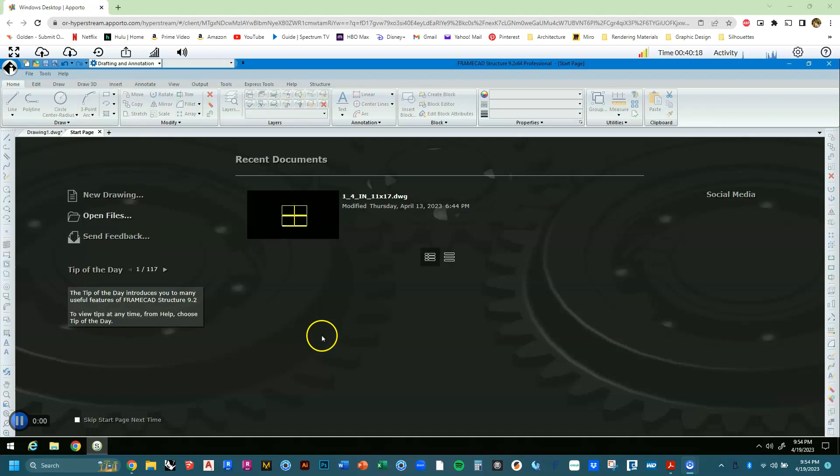Hey everybody, I'm sorry that I can't be in class today. I'm unfortunately doing a 30-hour OSHA safety training course in Santa Ana, and I'll be doing it this weekend, and I'll do it again in a couple of weeks. So, very sorry that I can't be there in class today.

But I thought I would go ahead and record a nice little video, and I'd like to go over the two-story house tutorial. I know a lot of us got a good head start on it in last class. I'm pretty proud of where everyone got to, but we got a little behind in certain steps. So I'm just going to record this video, and this will be the assignment that's due in the next week. So go ahead and use this video to help you get the tutorial done.

I've got my PDF open. I've got my binder here too, but I've got the two-story house PDF. Should be available there on Canvas. Let's go ahead and get started. So I'm going to open up FrameCAD Structure. I'm going to go to Open Files, and I'm going to navigate to my folder that I have on my desktop in Apporto. You guys should all have your little folders on the desktop if you made that in the first few weeks of class. I'm going to navigate to the correct folder where these files are currently living.

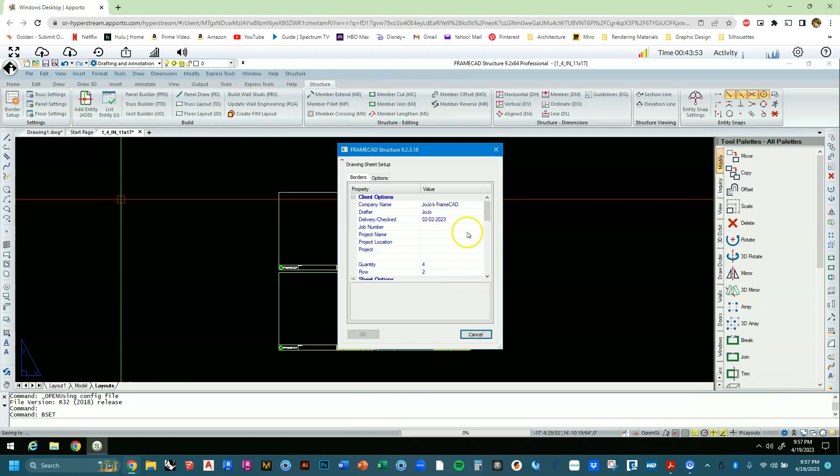So all these settings here were saved into the template that we've opened up, right? So what we're going to do now is adjust this template to create a brand new template. We're going to save this file and give it a new name, because it'll be a new template that we can use in future projects. And then we'll save over it one more time to start this particular two-story project.

Okay, so I've got BSet open. I'm going to go to sheet quantity. I want to make sure that it's at 6 for this particular project. We need more than 4. And row is still going to stay at 2. I'm going to hit OK, and I'm going to go to P set, or panel settings. So type that in, P set. These are our settings for panels.

Some things I want to modify include, in panel model settings division, Plaster stud 1 should say 3/4 inch. Plaster stud 2 should say 3/4 inch. Add service holes to top plate: we don't usually want service holes in our top plates. If we end up needing service holes in our top plate, we can add them later on in Detailer. It would be easier to add in the few service holes that you want on your top plates versus removing every service hole from each panel later on. So we'll set that one to false.

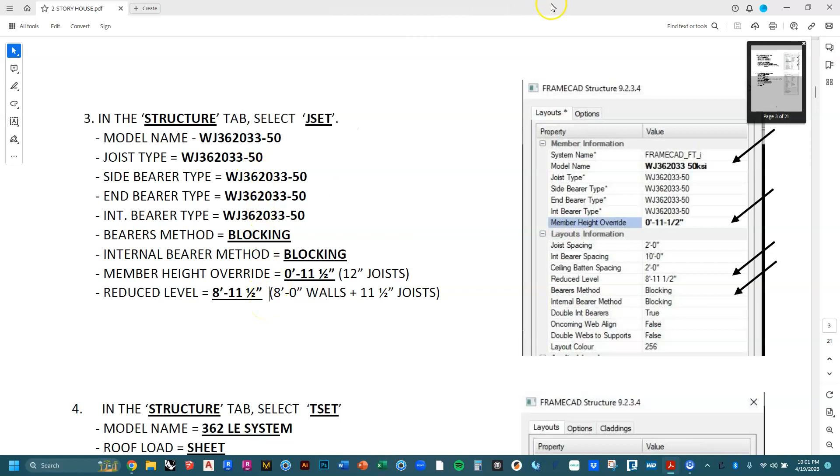And what we want to do is we want to make sure that our settings are pretty close to this screenshot. And make sure that model name, joist type, all of these settings are changed. So I'm going to go ahead and scooch that back over and do it here live. So model name would be WJ36203350. Click this secret little drop down menu, and I'm going to do my best to find WJ36203350. Should be that one right there.

And I want to make sure joist type, it's got the same model number, WJ362. 362 represents the 3 5/8 of our metal studs. 03350. WJ362-033-50. Our end bearer type should be the same thing. WJ362-03350. And one more time. WJ362-033.

WJ362-03350. Our member override height should be 11.5 inches. Okay. Our joist spacing should be 2 feet, 10 feet for the internal bearer spacing, 2 feet for the ceiling batten spacing. 8 foot 11.5 is our reduced height, so 8 foot 11.5 inch.

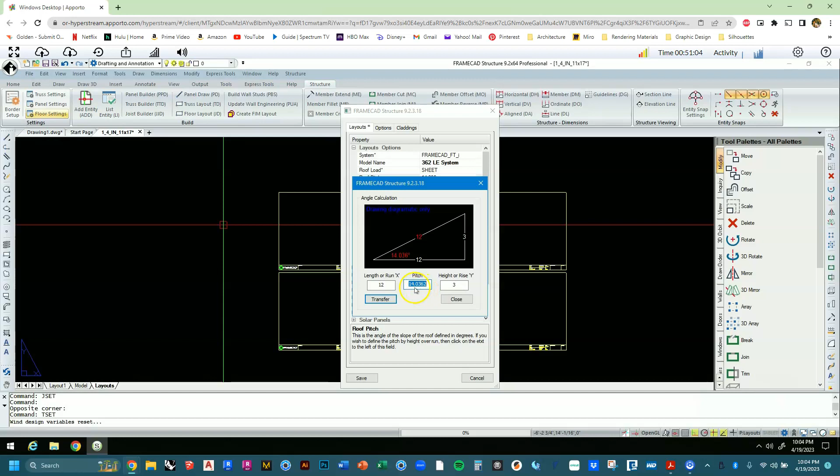So in this dialog box here, let's see, length or run. So if my length is 12 and my rise is 3, my pitch is 3/12, which is just a nominal ratio that we use in our vocabulary for roof pitch, but the specific angle is actually 14.0362. So now that we have that angle, we can just hit transfer and it'll update roof pitch and sub pitch.

That's one way of doing it. You can also just type in that number if you calculated it off to the side on your phone or whatever. So we've got 14.0362 twice. W110 is our wind speed. Let's go to reduced level. So reduced level, we want to set that one to 16 foot, 11.5 inches.

Reason for that is that our reduced level for the first floor walls is 0. The reduced level for the floor of the second story, and hence our joists, are at 8 foot, 11.5 inches. And so the reduced level for our trusses, which create the roof structure, sit on top of 8 foot walls, 11.5 inch floor, and more 8 foot walls. So altogether, that's 16 foot, 11.5 inches. Okay.

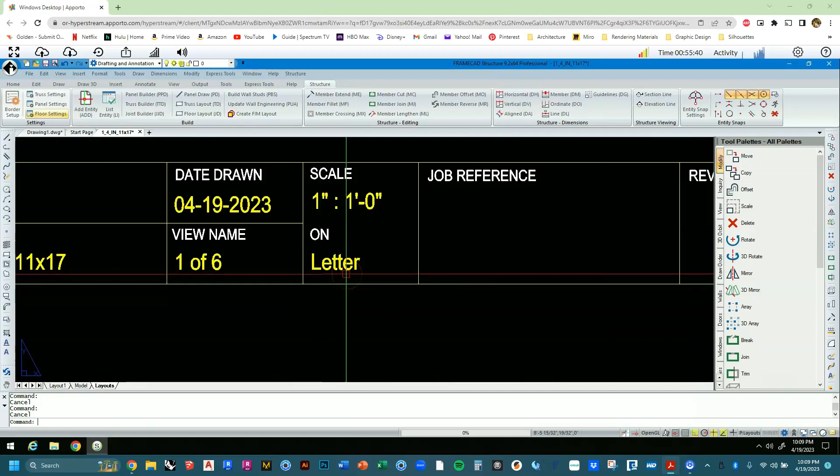Alright, that looks a little big. Let's zoom in and see what our scale is. Uh-oh, whoops. Looks like I didn't change the scale for my B set, so that's because I totally skipped the very first 6 steps.

Hey everybody, I'm sorry that I can't be there in class today, but I went ahead and recorded this video for you guys to play over and over again so we can have a 2-story house done in FrameCAD structure. The plan is that I'll go through the entire tutorial. You can slow it down, pause it at any moment that you want, and the goal will be for you to have your own 2-story house done in FrameCAD structure.

So let's get started. I've pulled up the PDF. This is on Canvas. You're looking for the 2-story house PDF. So let's start right here. One of the first things that we want to do is we want to take an existing template that we have, and we already started to do this in class, but I'm gonna start all over because we had a little bit of a mess in our class last Thursday. So I'm going to start fresh.

And so what we want to do is we want to open up our saved template, right? So we had already made a 1-inch template. So you want to open that template up, and immediately you want to save over that template. So you're going to do a save as, and you're going to title it 1/4 inch 11 by 17. That'll be the name of that new template.

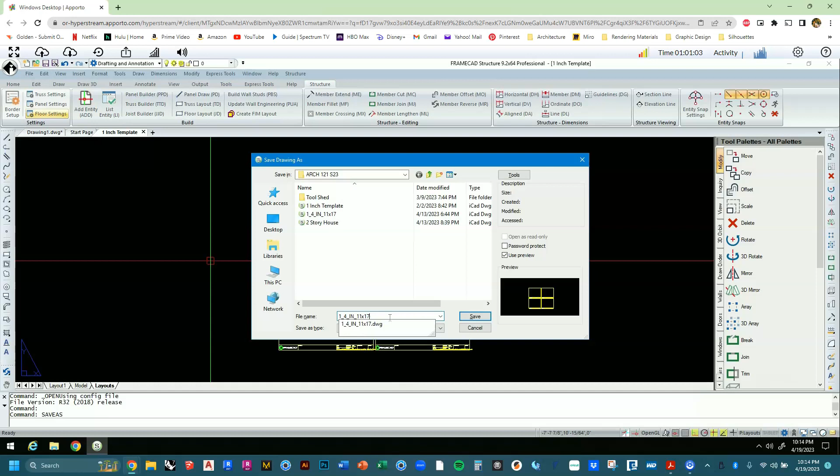So I'm going to go ahead and save right over that file that I made because I want to start fresh. I know a lot of us had issues going through this tutorial, so yeah, let's just start fresh. I'm going to click save, and it's going to ask me, hey, are you sure that you want to save it? You sure you want to call it this? You already have a file with that same exact name. If you name it this, it's going to replace the old one.

So yeah, go ahead. Let's do it. Alright, so now we technically have a whole new brand new template. It's got the same settings as the 1-inch template because I haven't changed anything yet. And so next thing I want to do is go to B-set, and I want to change the scale of my drawings.

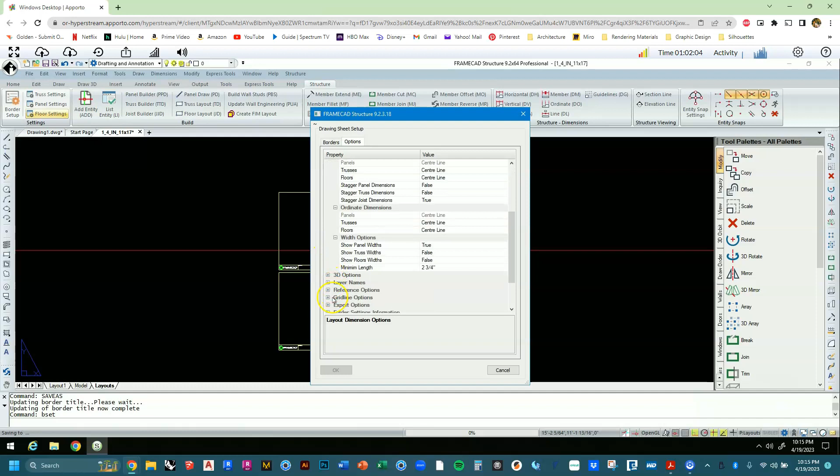This was set up in such a way that the scale is 1 inch is equal to a foot. Now what I want to do is use a 1/4 inch is equal to a foot. So let me find out where I do that. Oh, sheet options. So border scale, right? Border is talking about the title block there. The scale of that border is currently set to 1 inch is equal to a foot.

And I do not want that because it's going to create a really humongous, ugly drawing that won't fit on my sheets. So I'm going to actually call it 1/4 inch is equal to a foot. And as far as quantity goes, I think I want to go with 6 sheets laid out in 2 rows. Okay. And I'm going to hit OK.

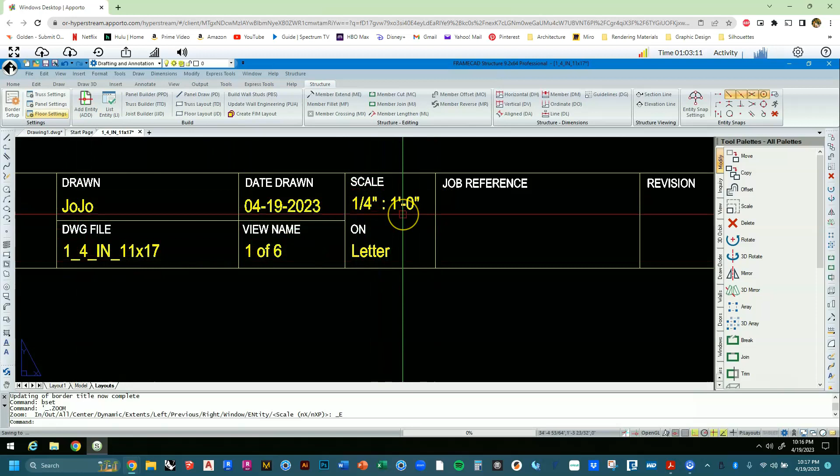So now, this is my new template. This is my new 17 by 11, and I can zoom in and see it's a 17 by 11. It's a 1/4 inch is equal to a foot. Actually, it says letter on it here. Let's see, do I want letter or do I want 11 by 17? Looks like I want 11 by 17. So I'm going to go ahead and do B-set. And I'm going to go to sheet options and change this to 17 by 11. There we go. Yeah, sorry about that.

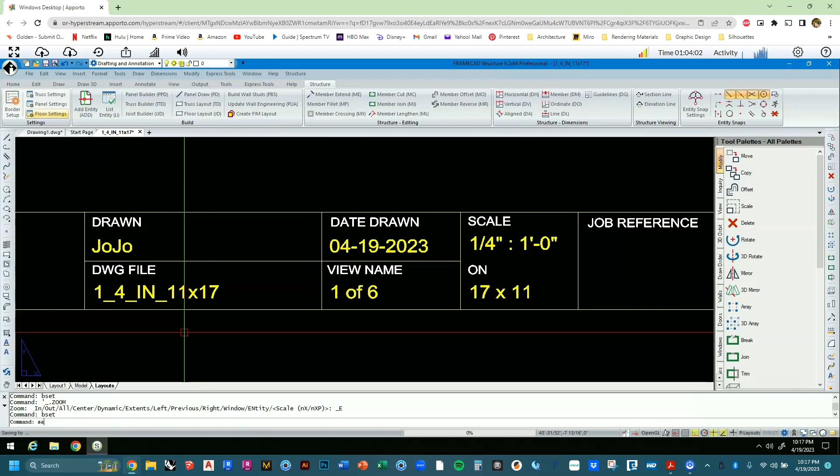Alright, now it's refreshed with 6 brand new tabloid size digital pieces of paper at 1/4 inch, right? So the scale of it and the paper size correlate with the name that I gave this file. So that's good. I'm going to type in save, and that's going to lock this in as my new template.

Sure, override it. So now I have a whole new template, and you guys always want to start with a template when you make a project. Otherwise, you got to go through all the B set, all the P set, all the J set, and all the T set. All those settings you're going to have to start over with unless you use a template. So I've got a new template now, and what I'm going to do is a save as again. So let's go save as.

And this time I don't need to create a whole nother template. What I'm actually going to do instead is give it a title appropriate to the project. And so this is the 2-story house tutorial. I'm going to call it 2-story house. And just like last time with the last template, we already have a 2-story house file. And I'm okay with replacing it because I want to start fresh.

If you want to not touch this 2-story house that you were working on last Thursday, give this a unique name. Okay, call it 2-story house number 2, or give it a funny name, the return of the 2-story house or something. I'm just going to leave it as 2-story house. I'm going to click save. It's going to ask me if I want to replace the old one. I'm totally fine with that.

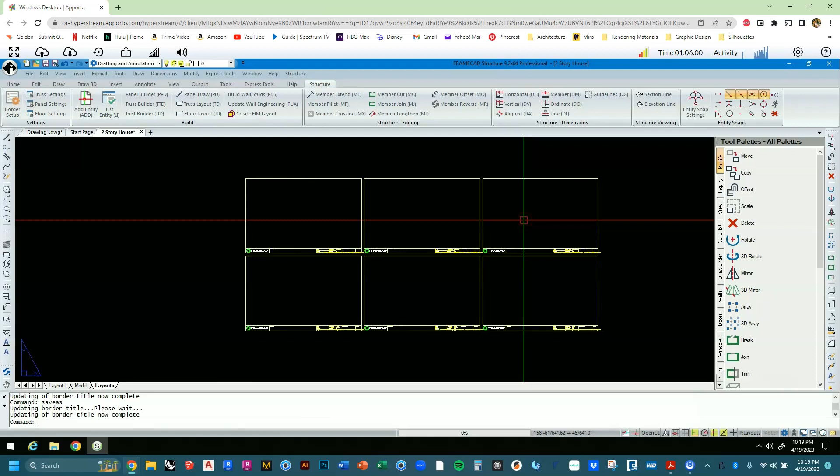Okay, so notice up here in this tab, it no longer says 1/4 inch is equal to a foot template, blah, blah, blah. Now it says 2-story house. So now I can actually get started with this file, this project. So what I want to do is type in B-set, and I want to change the... I already did the quantity sheets. I want to actually go ahead and skip to P-set now. So I'm going to go to P-set. Might have done that out of order.

P-set. So the important thing here for P-set is plaster stud 1 3/4 inch, plaster stud 2 3/4 inch, add service holes to top plate. Add service holes to top plate, that should be false. It would be a little bit easier if we say that this is false, and then draw in service holes as needed in Detailer, versus having Structure automatically populate service holes in our top plates, and then going to Detailer and removing them all, right? Because we probably don't need that many service holes on our top plates, if any at all.

So that's set to false. Add truss holes to top plate. We'll keep that at true. Brace panel information. Right here, K-brace, stud bay, or strap angle set to 1. Perfect. Okay, let's go to options. Let's go ahead and expand panel builder filters, and the one we want to mess with is called current view only, and we want to set that to true. And let's hit save. Okay, great. And I always recommend that you guys save your files as you go along.

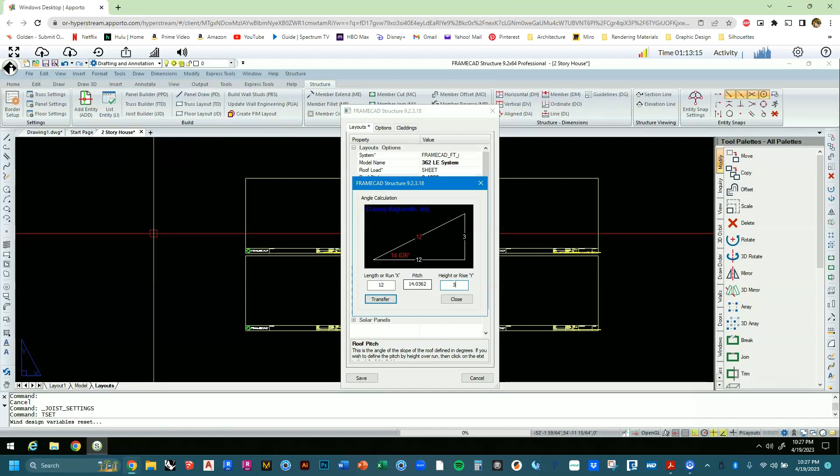So I'm going to make sure to change this because we are actually working with a 3/12 in this tutorial. So instead of 2, I'm going to hit 3. It's already calculated that for me, and I can hit transfer, and that's how I get my 14.0362. You can also do this calculation on your own if you're confident enough, but you just type in that angle right there.

Okay, so the next thing I want to do is go to reduced level. So again, with my reduced level, these are my trusses. All right, this is T-set. So the reduced level, if we visualize it in our heads, is we have foundation. Our top of foundation is at 0. Our 8-foot walls sit above that. So now we're at 8 feet. Our joists for the floor have a height of 11.5 inches. This is a 2-story house, so there will be 8-foot walls above that. And that's the reduced level in this situation.

So in this case, because we're dealing with trusses, the level is taken from the bottom chord of the truss, right? So if we have 8-foot walls, 11.5 inch floor, 8-foot walls, that gets us at 16 foot 11.5 inches. And that's the bottom of our trusses, because the top of our trusses could actually vary depending on the type of roof that we want to use, and it's got to account for the roof pitch.

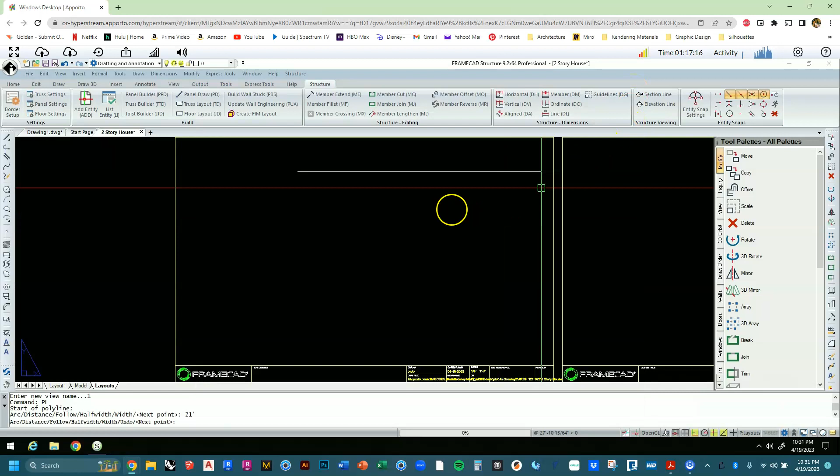What I want to do is I want to define the shape of this rectangle by saying 21 feet and hitting enter. And as you can see, what it did here is it made that 21-foot line, but now, because it's a polyline command, it's like, where's the next line going? Let's make some more lines.

So what you actually want to do is you want to make sure you hover downwards, so that way your line is starting to go down, and then you're going to type in 16 feet. Enter. Now, nothing happened, so I'm going to try that again. 16 feet, enter. Okay, there we go.

So now it still wants me to keep going, and I need to keep going anyway, so I'm going to say 21 feet, and now I'm going to close it up by saying 16 feet, enter, and it wants to keep going, but I'm all done, so I'm going to go ahead and hit enter, and I'm pretty satisfied with that. The next thing I want to do is, typically we want to try to center this as best as possible.

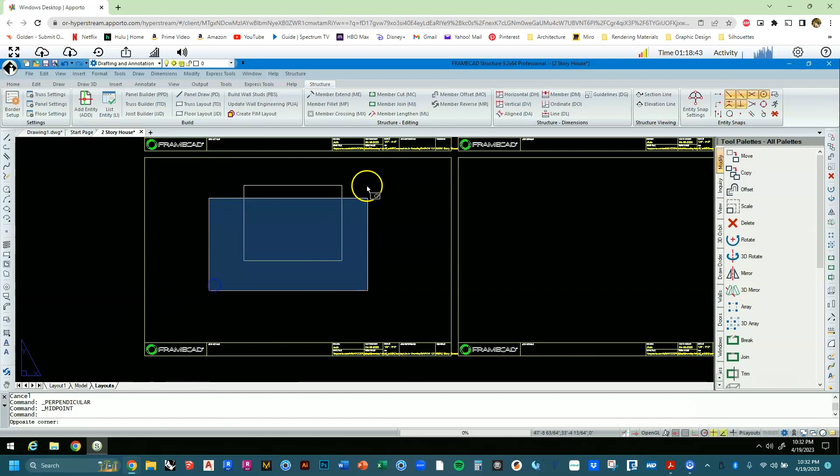So one strategy would be to, let's hit escape first. Here under entity snaps, I would make sure to have perpendicular snap on. That's always a good one. Let's see, I want to do my midpoint one. That one's always the best one. Set midpoint snap.

Okay, so now what we want to do is, if I highlight that using a cross selection window, type in M for move, and click here, right? I'm going to hover over it first. I'm going to let this CAD software figure out where the midpoint is, and I'm pretty sure I know where it is, but it understands exactly where it is, so I'm going to click that. So I just clicked it.

And what I want to do now is I want to find, let's see if I can find the midpoint of, oh, that's so cool. I'm going to put this way over here. Oh, I see, this is in Apporto. Okay, so what you can do is you can actually find the midpoint of this sheet, or as they call it in FrameCAD structure, there's a border. So I'm going to match the midpoints.

I'm going to move this rectangle from the midpoint of that top line to the midpoint of the border. Okay, so now it's vertically aligned, and the next thing I want to do is, just to be technical and have it perfectly centered, I'm going to type in PL, hit enter, and just draw a line from, let's say, from here to right there, hit enter.

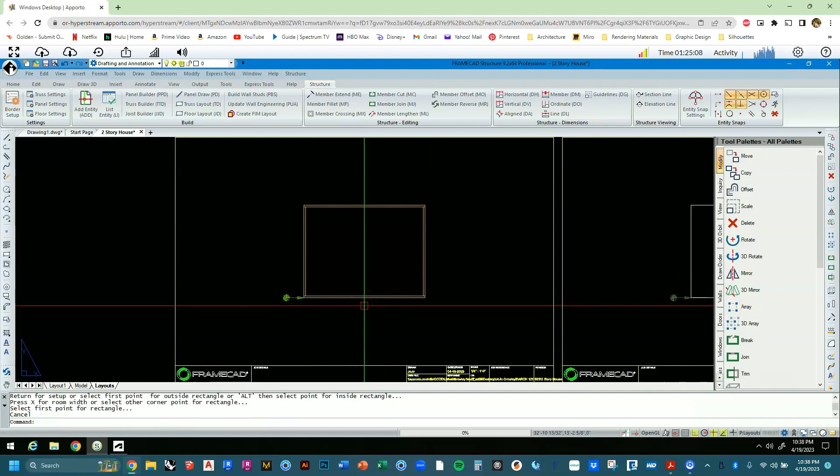Next thing we want to do is, let's hit escape a couple times to just finish that panel trace command. Let's do LI, and what I'm going to do is just hover over these walls. Oh, I guess I can't do that, but if I go ahead and click on them, and if I zoom in, I can see that I've successfully clicked and selected those panels. I can hit enter, and so LI allows me to change some of the properties of these specific panels.

And so what I want to do is say panel usage. I'm going to set that to load bearing, which it already is set to. Floor type is going to be concrete because these are the first floor walls. So they're sitting on a concrete pad, right? My other options here are timber or steel. So concrete is the one that makes sense.

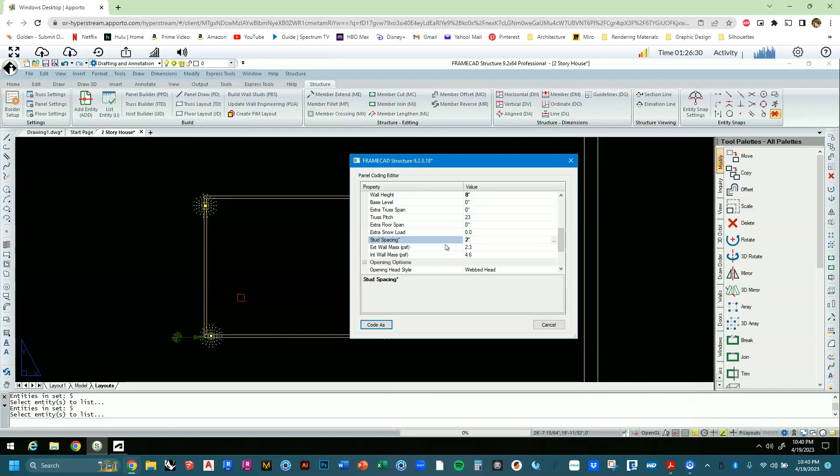So now these walls are red. So as we move along through this exercise, we're going to notice that the load-bearing walls will turn red if they're set to load-bearing. Great. Let's also verify the noggin height.

And what we want to do is do the interior wall. So to trace this panel this time, instead of using the rectangle command, we're going to type in mid. And I want to find the midpoint

of this panel, and I'm going to drag my cursor downwards, and the next thing I want to find is either the midpoint of this panel down below or a perpendicular point, because I want this to go straight up and butt up against that wall and create this perpendicularity.

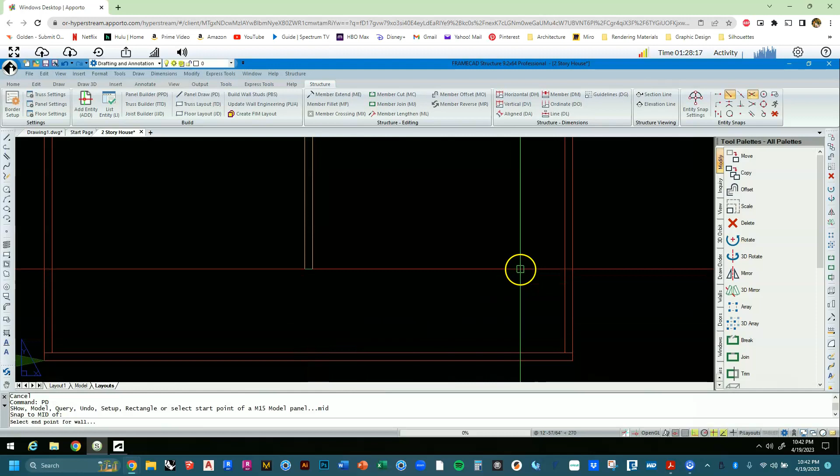For some weird reason, the O-snaps will reset as you're working in the command, so turn on perpendicular and go ahead and turn on mid if you can find it.

Just always escapes me. Oh, it only wants one at a time. So I'm going to go with perpendicular because I definitely just want it to go straight up against this wall. And so now I've found the perpendicular point. I'm going to go ahead and click that. And now if you hover back and forth between the walls, it's going to do this fancy little dance because structure wants to know which way you want to lay this panel down.

And this part doesn't really matter, so we're just going to choose one side. I'm going to move my cursor to the left and give it a click. I'm going to hit escape a couple times to just finish that command, type in LI. And let's go ahead and LI this panel here. Working? Oh, there we go. Let's hit enter. This time, this interior wall, I'm going to set it to be non-load bearing.

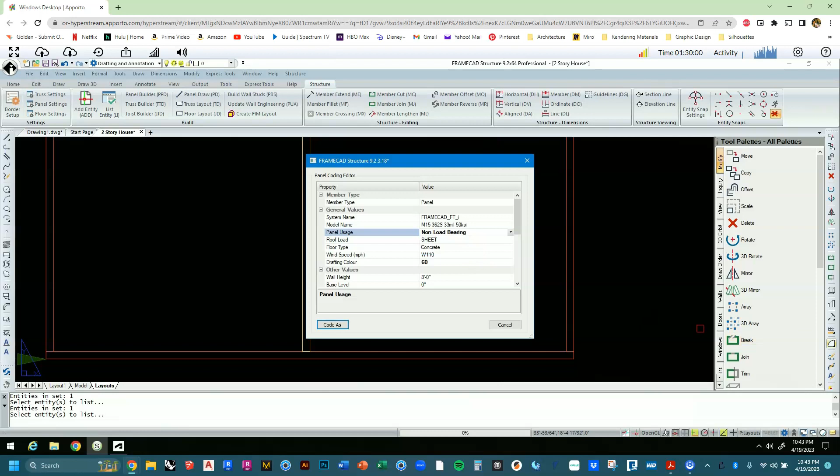What's going on here? So, panel usage, non-load bearing this time. And then click code as. And what you may or may not notice is now, instead of this amber color, this non-load bearing wall is this really bright yellow-green color. Alright, so the load bearing ones are red for your own reference, and the wall in the middle is really bright yellow. Okay, this is probably a good time to save, so let's go ahead and save.

Alright, now what I want to do is type in LA to label these panels, and it's going to ask me to select panels to label or enter for global selection. I'm going to go ahead and create a window over all the walls and hit enter. And now it's asking me what number do I want to start with. I'm going to say 100, just to have this naming convention that makes sense, right? 100

denotes the walls on the first floor, and probably will label the walls on the second floor 200. So that way when we go and print them, we'll know, oh, these are all on the bottom, and these ones that say 200 are going to be on the second floor. So hit enter, and you should have properly labeled walls. Notice that the load-bearing walls have an L, and this non-load-bearing wall has an N.

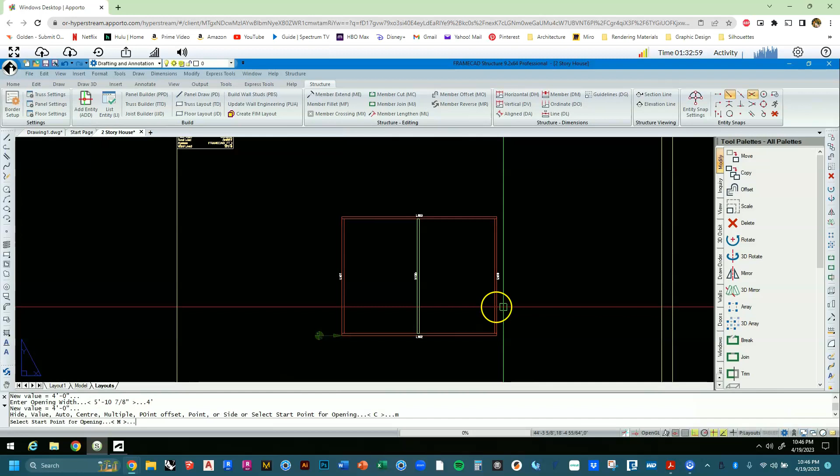It'll place 2 windows. So L100 is right here, and I'm going to click in this top left corner and top right corner. It's asking me for my quantity. I'm going to leave it set at 2 and hit enter. Okay, so now let's go ahead and make 2 more windows. I'm still in the window command, and I'm going to do 2 more windows on L102. So I'm going to click on this endpoint, click on this endpoint. You want to make sure that the endpoint that you're clicking on is not this endpoint or this endpoint, but the bottom right corner of this panel. We're going to keep that at 2, and now we've got 4 windows in our floor plan right now.

So let's see, now let's do some doors. So the command for that would be, let's hit escape a couple times, and let's do UD for user door. Our opening height would be 6 foot 8 inches. Opening width, let's make that 36. And this time we're going to use the point offset, so type in PO. PO is capitalized here, and so is multiple, and so is center, the C and the M. So if you type in PO, we can do a point offset.

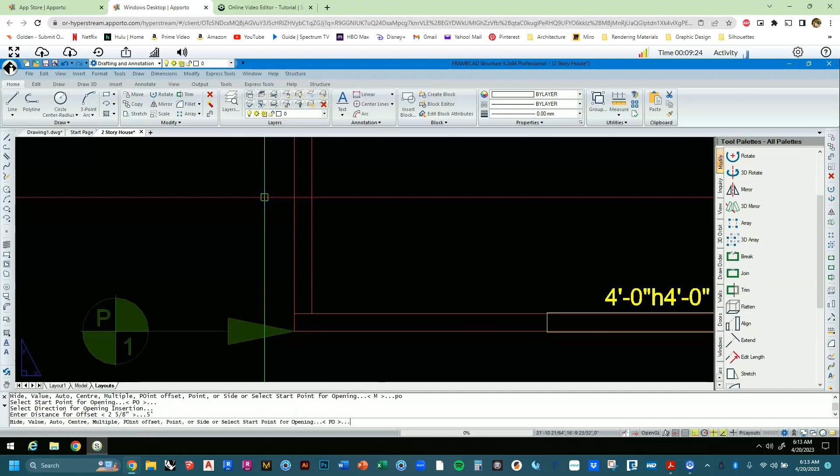So let's do another door on N100. Same way. So I'm still in the user door command. It's asking me how I want to make the next door. PO is still selected, so I can just hit enter. Sorry, I guess I can. So user door, 6 foot 8 opening, 3 foot width, and PO. Let me just type in PO just to make sure.

Okay, great. So now I can highlight this endpoint. I'm going to hover my cursor upwards in this direction. I'm going to left click, and my point offset distance will be 5 feet. So I'm going to hit enter. Now I've got another door there.

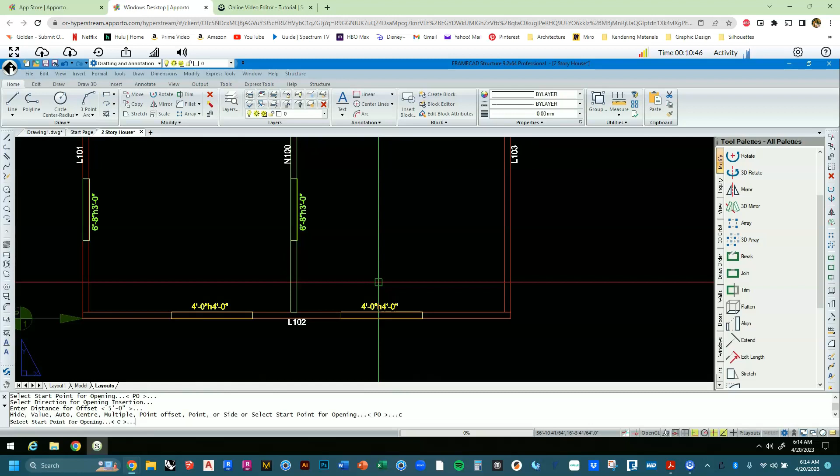And then the last door we want to make is going to be a garage door opening. So this user door, let's see, we're going to choose C for center this time. So the start point would be here, and I'm going to pan up this way using the middle wheel button, and then click here. And there we go.

That's a little small, so I'm going to escape a couple times and undo that. Okay, great. So I'm just going to start the command over again. UD, opening height 6 feet, the width is 12 feet. And I'm going to choose C for center. And I'm going to click here, and I'm going to click here, and Structure will find the center of those 2 points and put a big 12-foot opening there.

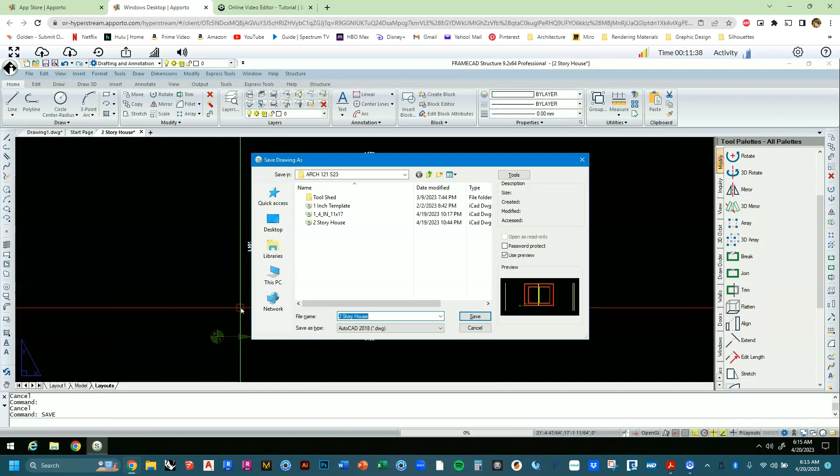Alright, so now what we want to do is hit save. Oops, I'm going to hit escape a couple times and hit save. Okay, just do a quick save. And let's do A3D. I'm using the middle wheel button. If I just click and hold and drag it around, the middle wheel button will do what is called a pan. If I hold down shift and start panning, I can actually do what's called an orbit. So this is how I'm navigating around the 3D viewport. So everything's looking good. Got 4 windows, 2 regular doors, and a garage door.

Okay, so let's go back to layouts. And I am gonna hit escape a couple times, and what I want to do now is create support lines. So if I type in CSL, okay, I can window select all of these walls. So I'm going to click right over here in this corner, and I'm going to click way over here in this corner. I want to make sure to encapsulate all the walls, and I'm going to hit enter.

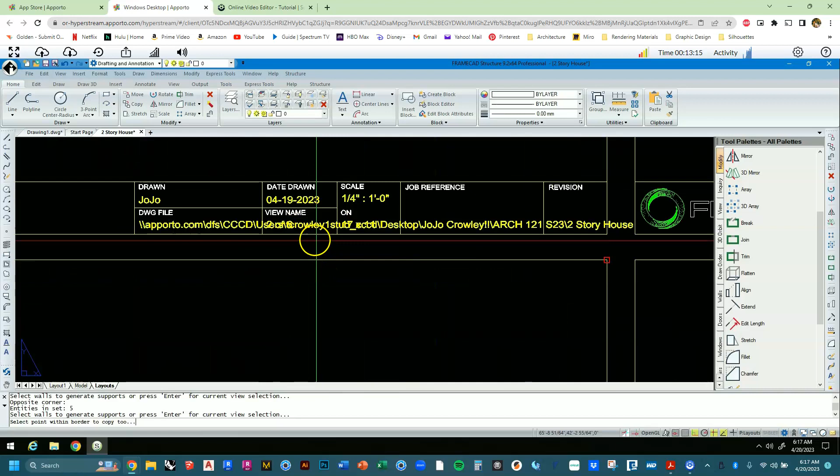Now it's asking me where I want to put these support lines, and I want to do a left click here in view 2, and I can zoom in to double check to make sure this is view 2. Let's see, where does it say view name? It's hard to read because of Apporto's crazy file naming scheme, but this is view 2 of 6 right here under view name. So I can go ahead and left click right there in view 2 and hit escape a couple times.

If I zoom into view 2, what it's done is it's created support lines to represent where the walls are occurring within the building footprint. This will help me create the second story floor. Okay, so now what we want to do is let's save. We're going to create some floor joists now.

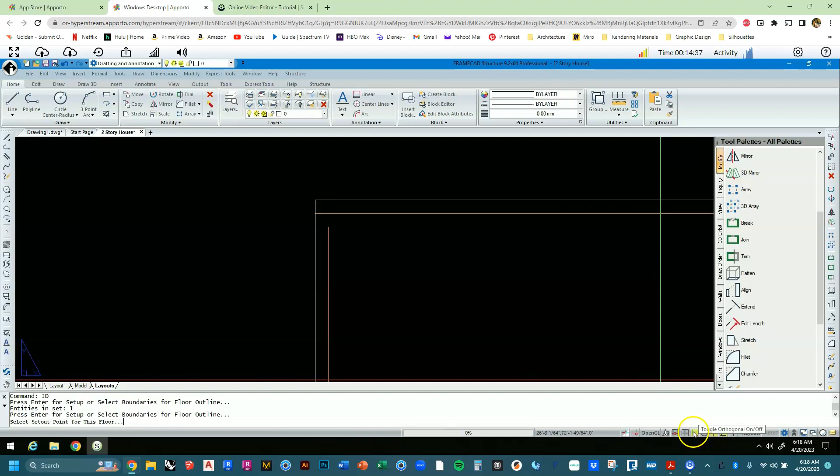So I'm going to do V space 2 space, just so I know I'm in view 2, I'm going to type in JD to create the floor layout, and I'm going to select the polyline outline and press enter. So let's zoom in. Let's click on that polyline and hit enter. You want to make sure that ortho is on. This is ortho right here. If it's highlighted yellow, it means it's on. If it's not highlighted yellow, click right there, so that way you can turn ortho on.

And we're going to move our cursor to the upper left corner of the outline, which is right here. And then you're going to left click and indicate the direction of the joist. So if I click here, now what you're seeing on the screen is Structure's way of asking me which way I want my joists to run, and I want them running this way, right?

This is the shorter span, right? If I did it this way, that's a longer span, and that just doesn't make much sense. So I'm going to go down this way, and I'm going to left click there, and you should get something like this.

Okay, so these should all be sitting directly above the original polyline or the building footprint that we had put in each view. This is the support line below, and it's sticking out inwards towards the center of the building. So this is all looking good.

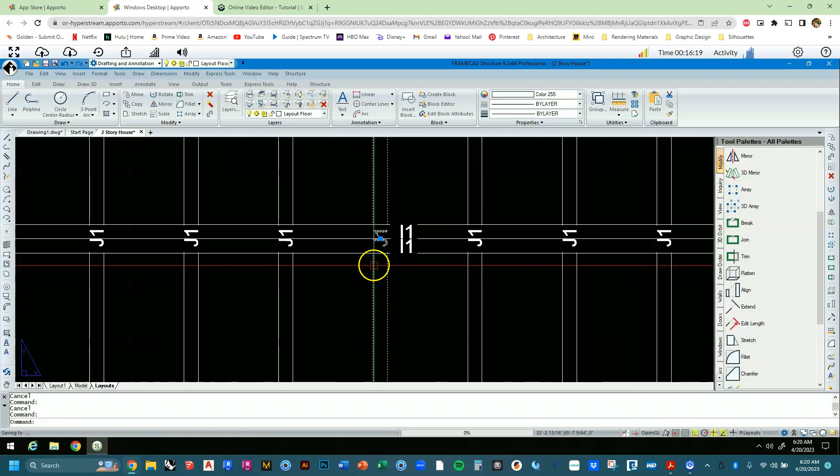Except I've got a double right here. I don't really need a double. So what you could do is you could actually delete that if you wanted to. Or you could just bring it back. I don't think it'll hurt to have double. Let's see. Oh, I see what it's doing. Wow, that's kind of cool. Okay, so I'm going to investigate a little bit.

I'm going to type in JSet to see what I might have on that's incorrect. So I'm going to go back in my PDF, go back to JSet. I want to check out my joist settings. So for JSet, bearer method should be set to blocking. So that's probably what we're seeing. This is probably a result of bearers inline.

So what I'm going to do is undo. This is incorrect as far as what we have in this tutorial, so I'm going to undo just far enough so that way my floor is gone. I'm going to type in JSet, and for bearer's method we need blocking and blocking. Okay, I'm going to save that.

Now I'm going to type in JD. I'm going to select this polyline, hit enter. I'm going to left click on that endpoint there, direction of joists. I want them to go straight up and down this way. And there we go, much better.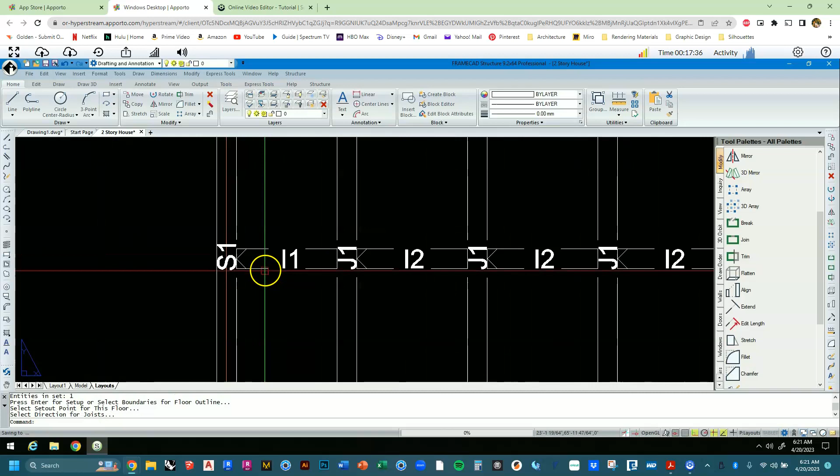So this is what's known as the blocking method for bearers and internal bearers. So that's what you get. You get these smaller pieces instead of a huge long piece. So that's looking good. Okay, so let me go back to my PDF and scroll down, scroll down, scroll down.

Okay, so at any point in time as you're going through this model, hitting A3D a couple times is good for you to preview everything to make sure that everything's in the right place. So if I type in A3D, that's going to delete the previous 3D model that I had looked at, and then I can type it in again, or since it was the last command, I could just hit enter. By hitting enter without typing anything, it's just going to repeat the last command.

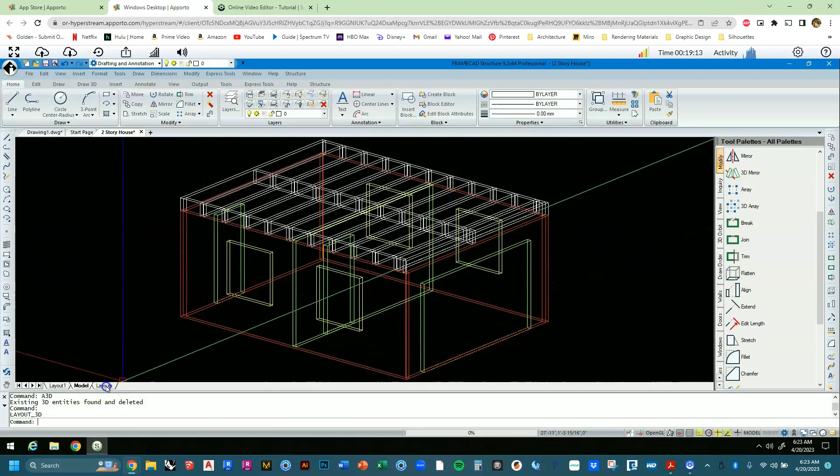And there we go. This is looking perfect. I've got 5 walls on the first floor. I've got a floor directly above and on top of those walls. Everything's looking really good. So if this floor was on the ground, I would know that I set the reduce level at the wrong height, because the floor on the ground is not going to be a FrameCAD thing. That's going to be like a concrete pad. So it's looking good. So back to layouts.

Let's create the second floor now. So I'm going to type in V space 3 space and utilize view number 3. And again, the numbering scheme here in structure is 1 is this bottom left one here, 2 is directly above it, and then you go diagonal, 3, 4, 5, and 6. But I like to just hit V space 3 space. That way I don't even have to worry about what the numbering scheme is. It's just going to take me to view 3.

So in view 3, we're going to type in PD for panel trace. We're going to use R for rectangle. And we're going to hold down the Alt key. And I'm going to hover over this corner until I find the endpoint. And hover over this corner, still holding down Alt. And boom, I'm going to put those 4 walls in place. Okay, I'm going to hit escape a couple times.

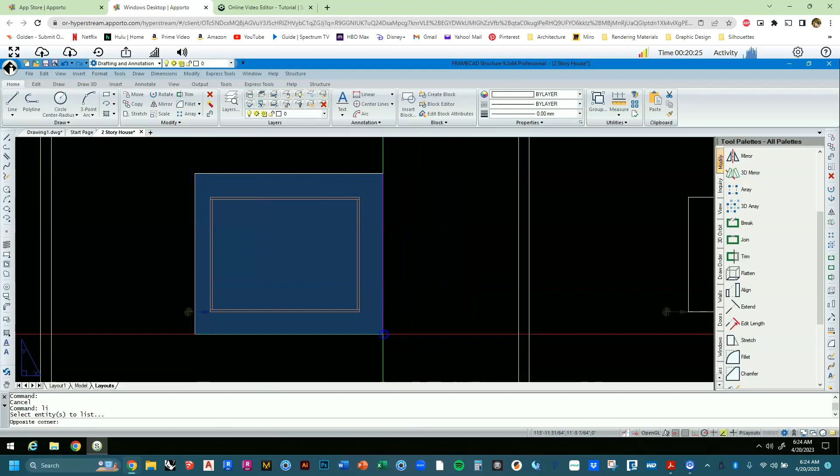I'm going to type in LI. I'm going to select all these walls just like that and hit enter. These walls are going to be load bearing because they will be bearing the load of the roof or trusses. So yes, they are load bearing. The floor type this time is steel because we just made our steel floor, so we can tell this program that.

Wall height is going to stay at 8 feet. Base level. The base level is similar to the reduced level. So what we want to say is the base level is 8 foot 11.5 inches. So that way structures understands to put these 4 walls on top of the floor, which is at 8 foot 11.5.

And stud spacing, let's make sure that says 2 feet. That's perfect. And let's click Code As. Walls turn red. Those are load bearing. Let's do LI again and hover over these walls and double check the noggin height. Let's go to noggin height. So 4 foot 13/16. That's perfect.

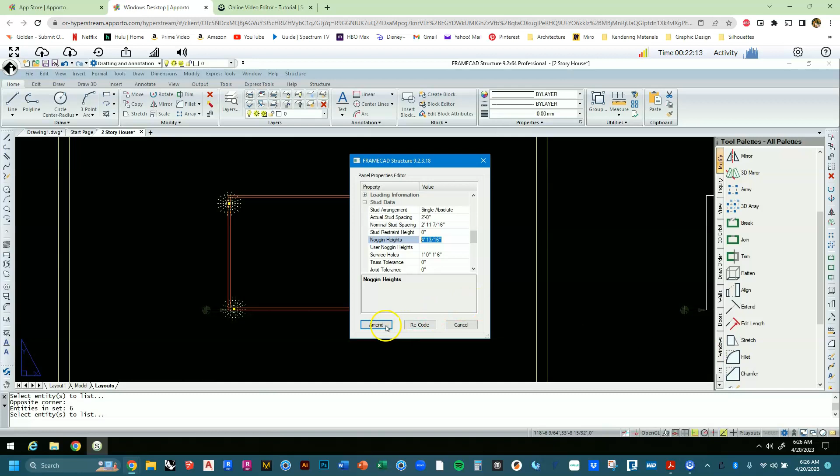It's recommended that if your walls are taller than 8 feet, you go ahead and add a second set of noggin heights at 8 foot 13/16. So we're going to leave it as that.

Let's go ahead and label these. So I'm going to hit escape a couple times, hit LA. I'm going to make sure to click and select all these walls, and the labeling method is going to be 200. I'm going to label them with 200 as a starting point. I'm going to hit save. So we got L200, 203 is right here, 202, and 201. So when I go to print these out, I know that since they're 200s, they're going on the second floor.

So now what we're going to do is put in some more windows, so that way we can look out at the view in our 2-story home. So UW, let's type in H for header height. Make sure that it's at 6'8". It is, because it remembers the dimensions I used last time. Our height is going to be 4 feet. Perfect. Width 4 feet. Perfect. I'm just hitting enter. And we're going to type in M for multiple.

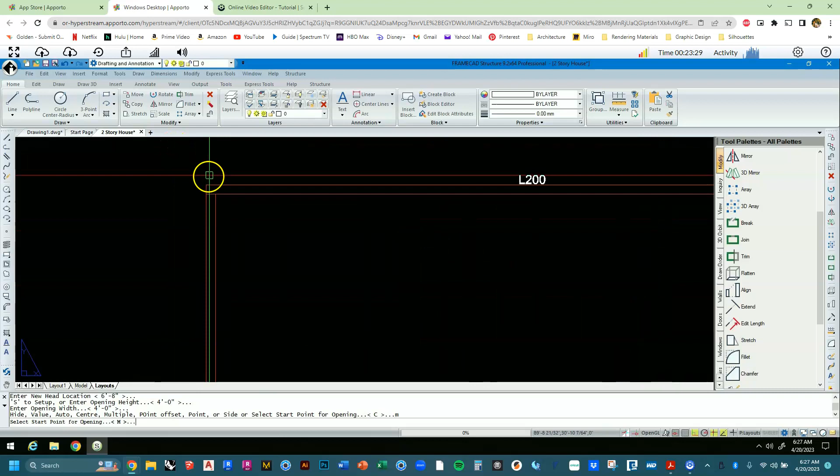I'm going to go right over here. I'm going to find that point, and I'm going to go right over here, and I'm going to click on that point. And it's asking me the quantity that I want. I'm going to say 2, hit enter, and there we go. So I'm still in that command. I'm going to just go ahead and do it all over again. Do it here to there. Quantity of 2. There you go.

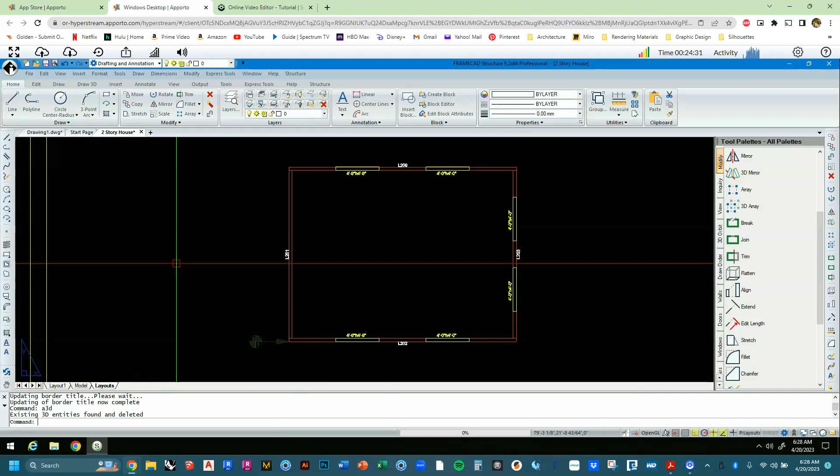Let's do it here to here. Quantity of 2. All right. I guess this wall doesn't get any windows. It's definitely not getting doors. So let's hit escape a couple times. Let's do a nice quick save and type in A3D once. Hit space one more time. Remember, you can hit space, enter, or right click, but that'll repeat the A3D command. And check out your progress. Everything's looking great.

Alright, so let's go back to layouts. This time we're going to create some more support lines. So I'm going to type in CSL, and I'm going to create a nice big window to show where all these walls are. I'm going to hit enter. I want to be in view 4, so again 1, 2, 3, 4, and I'm going to click within that view. And if I look closely, it transferred some support lines onto this sheet. Hit escape a couple times. Hit save.

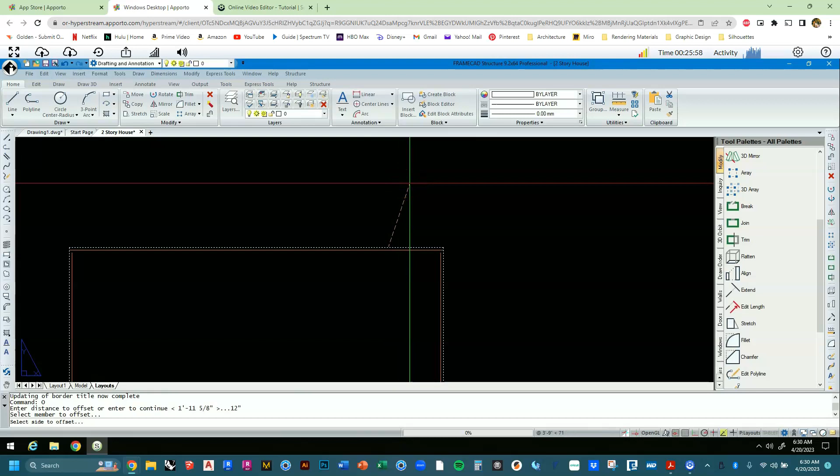So now we can do the roof. First thing we want to do is create the roof overhang. So to do that, we're going to type in O for offset, and the overhang distance is going to be 12 inches. And I want to offset our building footprint, and it's giving me this line. So whenever you see this line, it's always Structure's way of asking you, hey, which way do you want to go? So I want to offset this building footprint 12 inches this way, because roofs overhang that way. They're not going to go inwards. So I'm going to click out here, and now I've got a nice 12-inch offset. I can hit escape a couple times.

So now what we want to do is type in RL. So RL, this is going to allow us to turn some of these lines into roof lines. So if you left click the outer offset line and hit enter, it's going to turn a nice cyan color. And hit escape a couple times and type in TD. So we did PD for panel trace, we did JD for joist, and now we're doing TD for trusses.

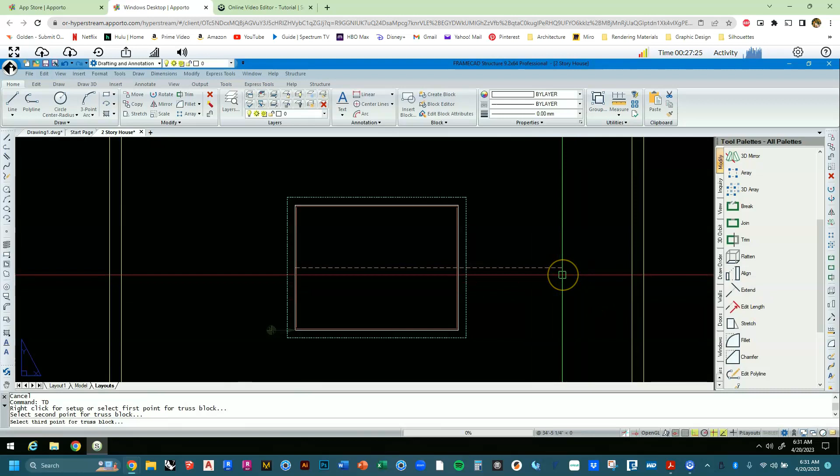So the way I'm going to do this is left click on the lower left corner of the inside boundary, lower left. So if I click right here, that'll be my first click. I already clicked it. There's that dash line asking you, hey, which way are we going? Now we're going to go to the upper left corner, right over here. And then now we're going to give it a direction again, and we basically want to tell it to go this way.

So move the cursor to the next, click on the upper right corner of the inside boundary line to indicate the area you want the trusses to cover. So we want to define the maximum extents of the trusses, and you can click on this top right corner.

In the command line, you're going to see different roof style options, and in the drawing, you should see a star over the left side of the roof. I'm not seeing my star right now, but I'm sure it's there somewhere in spirit. We want to do a gable, so G for gable. Okay, now the star is moved over here. This part of the roof is a hip, so we type in H for hip. Okay. So that's looking pretty good.

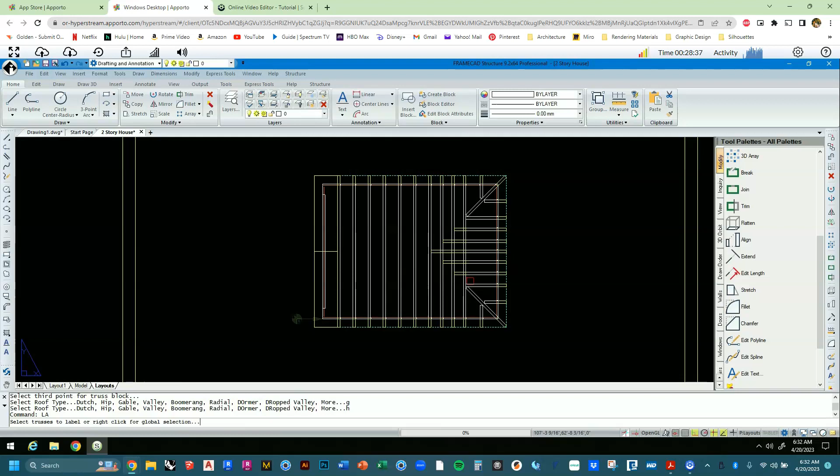Let's type in LA so we can label them. And I'm going to right click on the mouse to globally select all of the trusses. Okay, now they're all labeled. I'm going to do a quick save. And let's type in A3D a couple times. That's what your model should look like. Okay.

And also, if you double click on the middle wheel button in 3D, what it'll do is center your 3D model within the center of this viewport. So if you were to zoom out like this using the scroll wheel, just double click on that scroll wheel and it'll zoom you right into your model.

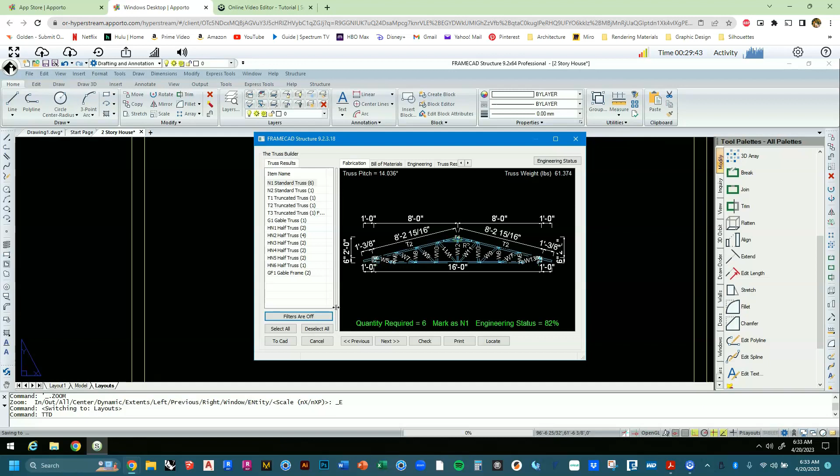Let's go back to layouts now. So we're here in view 4. I'm going to type in TTD. In the past we've used PPD for panels. TTD is the one we want to use for trusses.

If you expand this dialog box a little bit and expand this so you can clearly read all the item names, I've got all my trusses sitting right here as a list. And as I click through them, you can actually view each truss. This is what FrameCAD will print for you. If you look at them, it shows you the label that we gave them. It shows you the type of truss we've created, and it also shows you a quantity number, and additionally, for some of them, it'll show whether or not it failed.

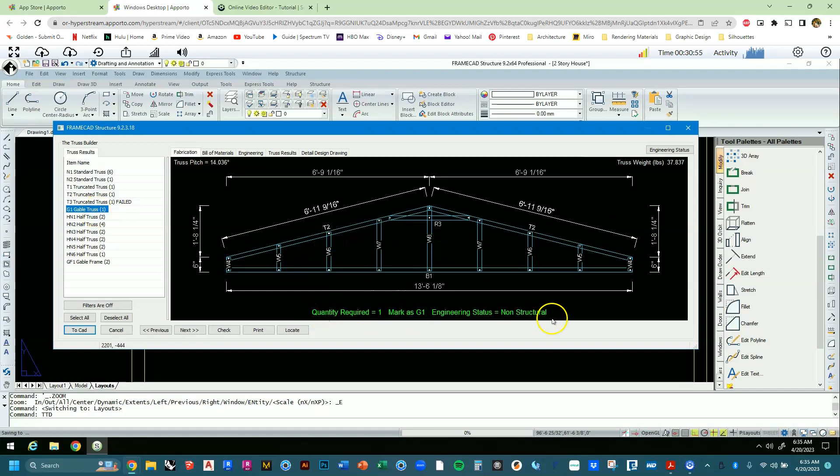It doesn't show passing for all the other ones, but if you click on this one, you'll notice that the text down here, which shows the engineering status, is all red. If I go to one that didn't fail, the text is all green. So we're all good to go on those. Notice that the engineering status is always 100% or less than 100% if it's a passing grade. For the failing one, it's above 100%. So this will be an area we need to fix.

So what we want to do now is select all of the trusses and click on To CAD. I'm going to give it a moment. Next to our Layouts tab, there's going to be a new tab here called Truss.1. This is a layout of each and every single truss. We can go through and modify these a little bit here. But what we want to do is look for the one that failed, and that's going to be this one right here. And we're going to attempt to use a few techniques to help it pass its engineering status.

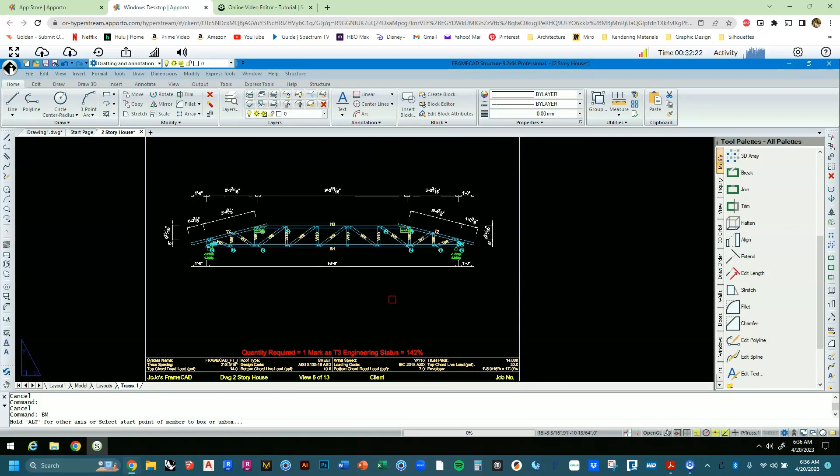So I'm going to type in BM for truss box. I'm going to hold down the Alt key and left click on the upper left corner of the chord H3. So find chord H3. Holding down Alt, I'm going to click on this upper left corner. And I'm going to click on the upper right corner of H3.

Alright. So once you make that kind of modification that moves you towards fixing the engineering of this specific truss, once you make any change to this truss here in this view, the engineering status will change to unknown. And that's because as we continue to reinforce it in certain ways, it's not going to update the engineering status until we code it, once we're done with the repairs that we're doing right now.

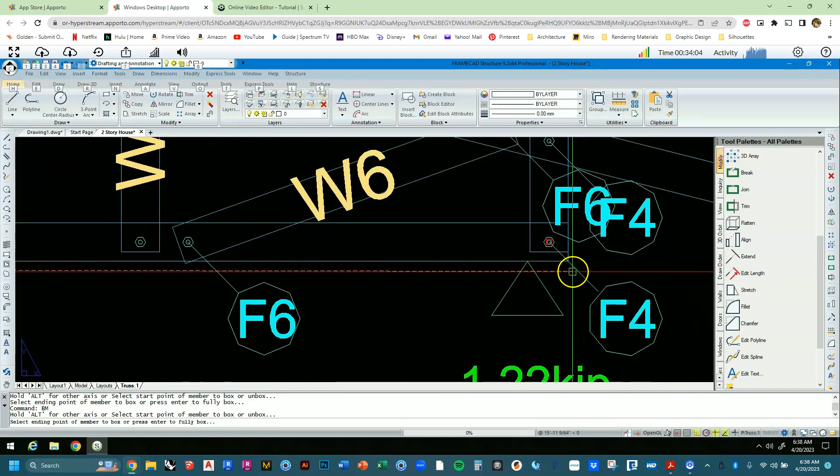So let's type in BM one more time, and we're going to hold down the Alt key, and we're going to click on the lower left corner of the bottom chord B1 and the lower right corner of bottom chord B1. So I'm going to zoom in. B1 is this bottom piece here. Okay. Holding down Alt, clicking this endpoint, zooming out with the scroll wheel, and then clicking right there. As you can see, it's actually doubled up on that, and you can see the extra little piece here and there. Again, the engineering status is unknown.

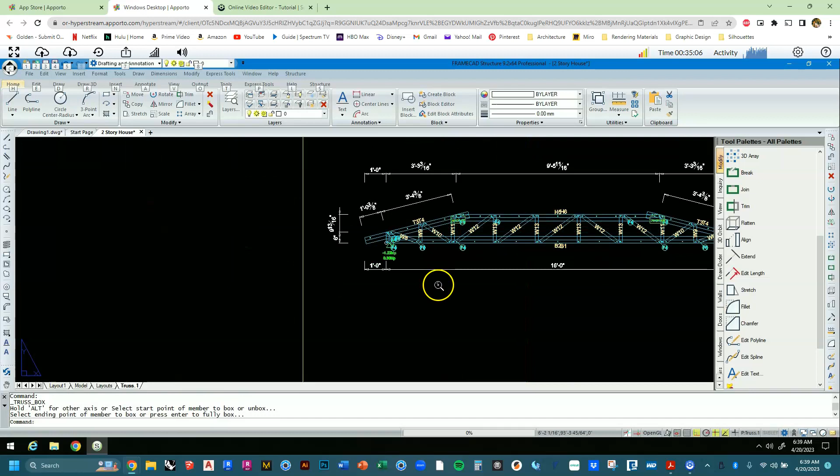So now what we're going to do is go to T3. We're going to do the same thing. I'm not even going to type in BM. I'm just going to hit the space bar, hold down Alt, click on this left corner, click on this right corner, watch it do its thing. You can hit space again to repeat that command, hold down Alt, do one here, and I really want to make sure I get endpoints and not necessarily just a near point. Alright, that one's all doubled up now too. Hit escape a couple times.

So, we've heavily reinforced the top chord, bottom chord, and the sides. So what we want to do is type in -TTD. Okay, make sure you put that little dash in there. Hit enter. Okay, zoom out, and you'll notice that engineering status is now set to 53%. So we're good now. So type in TTD, click on this one, and say update.

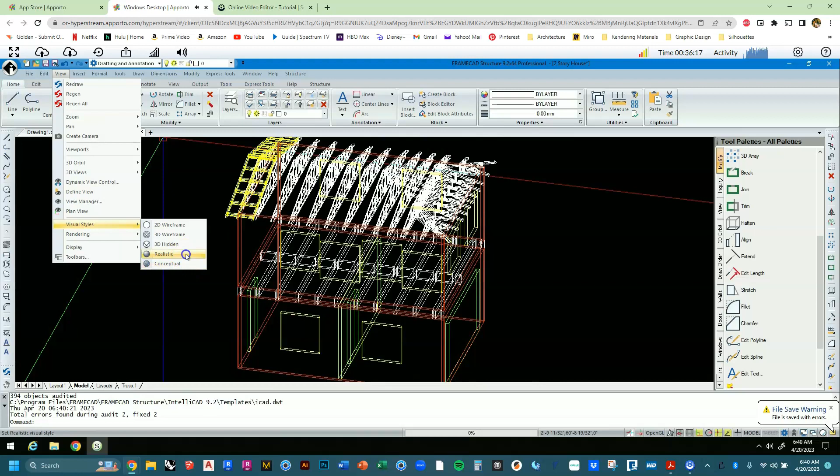Okay, perfect. Let's go back to layouts. Let's type in A3D a few times and just look at that. That's kind of cool. So what we want to do now is let's go to View, and let's go to Visual Styles, and let's go to Realistic. So we're not in wireframe mode anymore.

And so here in Realistic, you'll notice that the only items that look somewhat realistic are the trusses. The trusses were the ones that we actually sent to CAD, right? They were actual things that were CAD'd out, if you want to say. But the walls still haven't been done, right? They're still kind of in a more conceptual mode right now, but we'll get to those very soon. This is so cool. All right, so let's keep going.

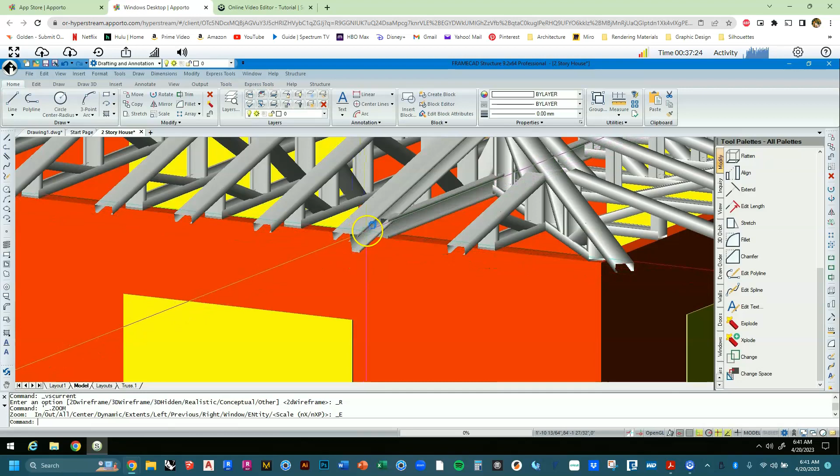Oh, also, check out that previously failed beam. Look how it's doubled it up. You see, so it put another stick right here on the side, and that's going to help reinforce it. Up here, on here, and down there.

Alright, save, please save. Alright, let's go back to the Layouts tab, and let's get more detail going for our panels. So let's type in PPD. Oh, excuse me. I want to go to View 3, so V space 3 space. These are my second floor walls. PPD. Alright.

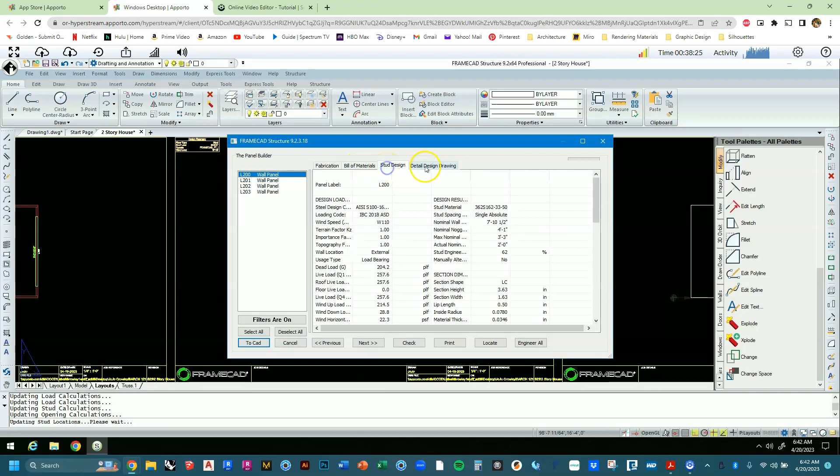And when you're in PPD or in TTD and JJD, you get a lot of information about all these pieces. You get a quick preview of the elevation and a bunch of information concerning weight, which will help you figure out cost before you even start building, and of course engineering status. So let's go through and double check and make sure nothing failed. I can tell nothing failed because it would have had the word failed in parentheses on the right side of these panels. Also, as I scroll through by clicking each one, the status is passing for all of them.

So we're going to hit select all and to CAD. Okay, let's do A3D a few times and see how our model's updated. So it's looking super real now. And also, when we did to CAD, we have this new tab now, Panel 1. And we can go through and double check, make sure everything looks okay.

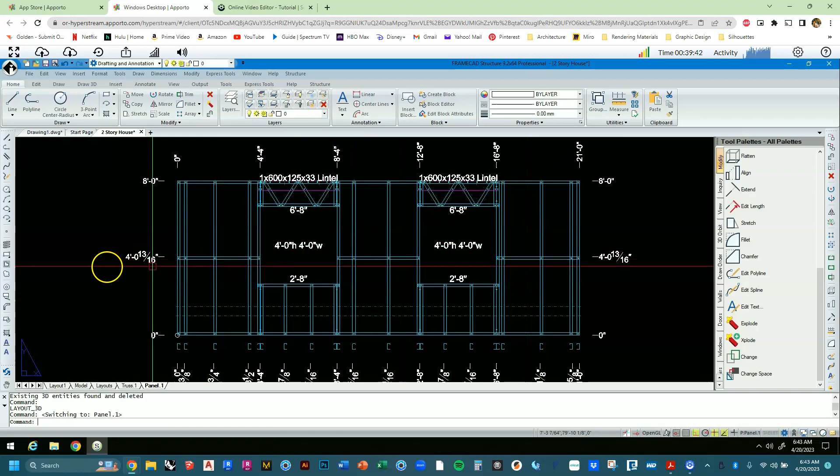Make sure our headers are at 6'8". Make sure the windows are the right size. Sill heights are correct. Top plates in the right place. There's our noggins at 4 foot 13/16. Everything's looking really clean. Cool. Save.

So let's go back to layouts. Let's do V space 2 space. Actually, that one's all done already. So let's go V space 1 space. And yeah, that's looking all really good. Let's do A3D again. I just want to check something. Okay, yeah.

So let's do PPD. Okay, everything's all passing. These are my 100s. Alright, they all look good. Select all to CAD. Got a new sheet, Panel.2. Let's do A3D again. Voila, that's all looking really clean. Alright, save.

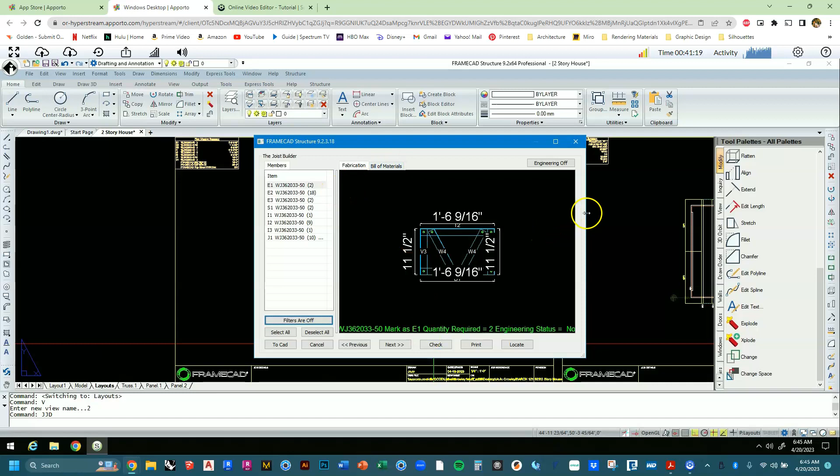Let's go to layouts. Let's go V space 2 space. I want to go to view 2. Let's type in JJD. And again, I would suggest that you expand this dialog box so that way you can expand this panel on the side. What we want to make sure to do is check and see if anything failed. And looks like we've got this one that's failed, J1, and there are 10 of them that have failed, so that's not good.

So go ahead and if you click on the engineering tab, you can see the top chord is red, and that's where the truss is failing. So it's this one right here. It's above that 100% threshold that we like. Right, you can actually zoom in this thing and pan around it, but you can see engineering results. It's all color coded, and it's the top chord that's really having the issue. So that's how you can identify which part of the truss you need to go and fix. Seems to all be in the center, but that's fine.

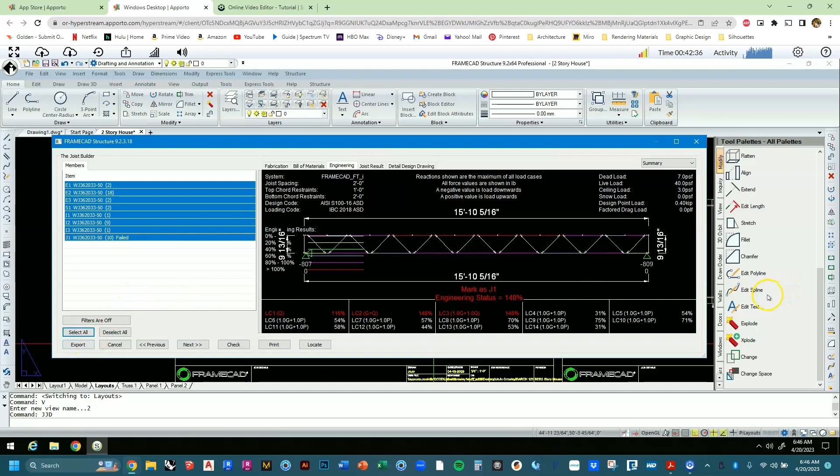Let's select all, and return to the fabrication tab, select all, to CAD. We have a new tab now called Floor.1. Let's go and find that view showing the failed trusses. So let's zoom out. We're looking for red. Here it is. So we're going to start to fix this one. Let's type in BM.

Okay. And we're going to click the upper left corner of this top chord. There's a few endpoints here. Oh, it's regen now. There's a few endpoints here. I want to make sure to hit that top one up there. Let's zoom out and do this one here as well. Okay, so boom, that's reinforced now.

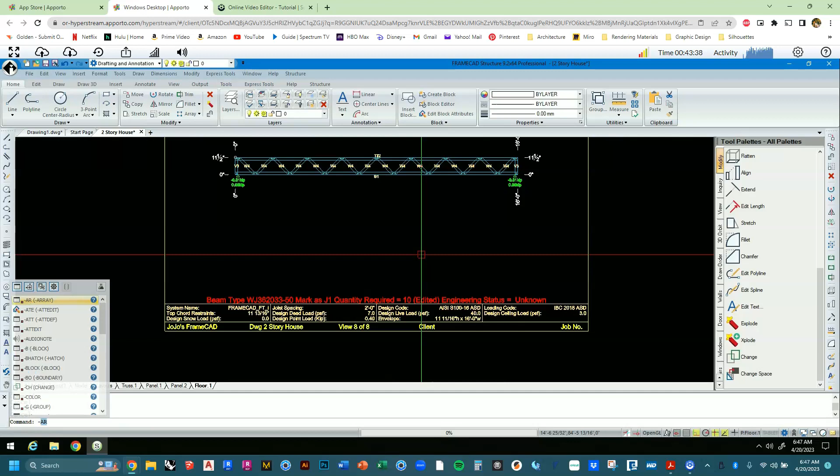Engineering status is unknown. So hit escape a few times, type in -JJD, and it's reevaluated and understands now this has got a passing status. So we were able to fix that top chord. Type in JJD, hit enter, and expand this panel. Great, it's passed, it's not failed. Click on update. That's looking good.

Let's do A3D once and a second time, and check that out. There are your joists. Everything's all framed out now. It's looking nice.

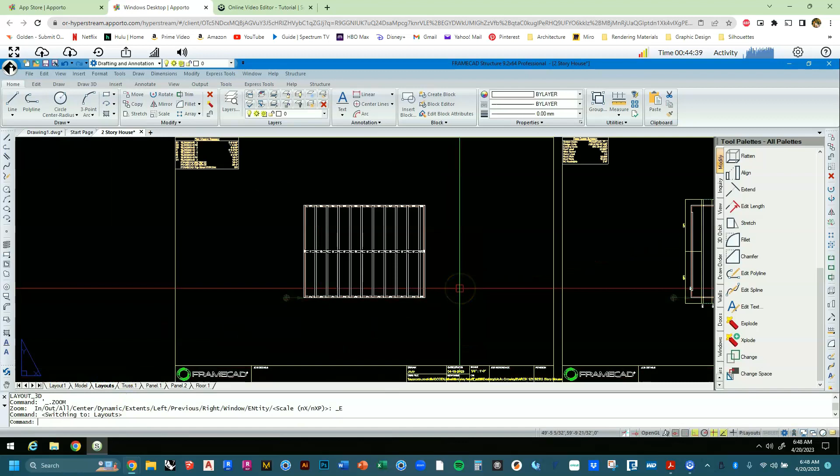So now we're going to work on adding bracing. So let's go back to layouts. Let's go to view 3. So V space 3 space. Now we're in view 3. We're going to type in PCB for panel wind. PCB. The lateral bracing calculation dialog box appears with text shown in red. I like to expand this a little bit because it doesn't usually give me enough room to read everything.

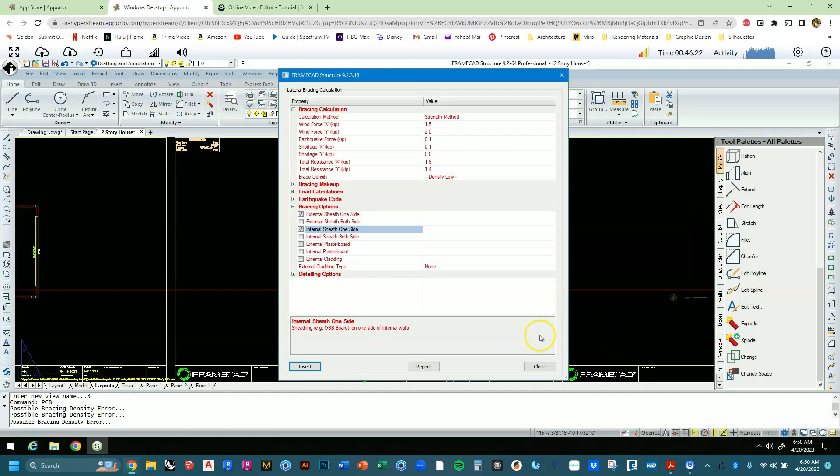Under bracing options, we want to make sure the boxes for external sheath one side and internal sheath one side are checked. External sheath one side, check. Internal sheath one side, check. And you can start to see it's updating some of this data here. Click on the insert button in the lower left corner. And in the command line, the default will be K-brace. So we had also set that up in our P-set, that our panel bracing option would be the K-brace variety.

Let's move our cursor to the panel 201. It's going to be this left one here. And we're going to add braces. So bottom center window view, and left click in the second space between the studs in the lower left of the panel. So lower left. So if I just click right there once, you'll see an X.

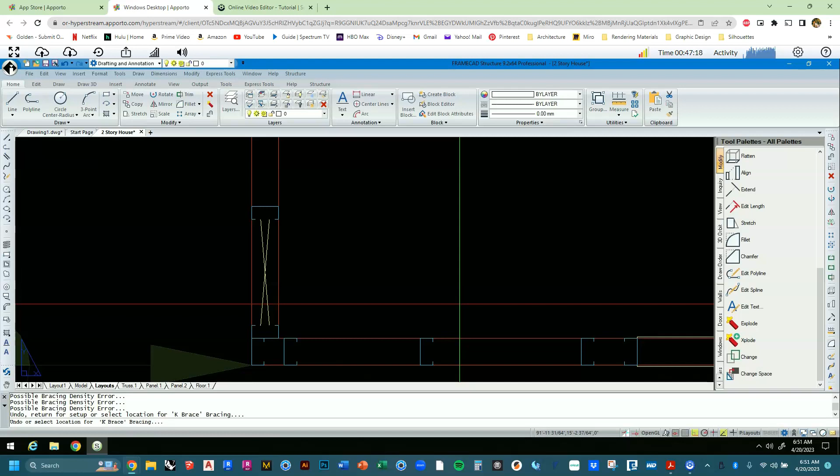We're going to add braces in the next two spaces moving up, so a total of 3 at the lower left corner. So if I zoom out a little bit, I want to get my cursor lined up in between this stud and this stud, and click. Same thing above this, in between these two studs, and click. And we're going to add braces in the two spaces in the upper left corner of panel 201. So let's zoom out. Upper left hand corner is this one and this one. So we've got a total of 5 right now.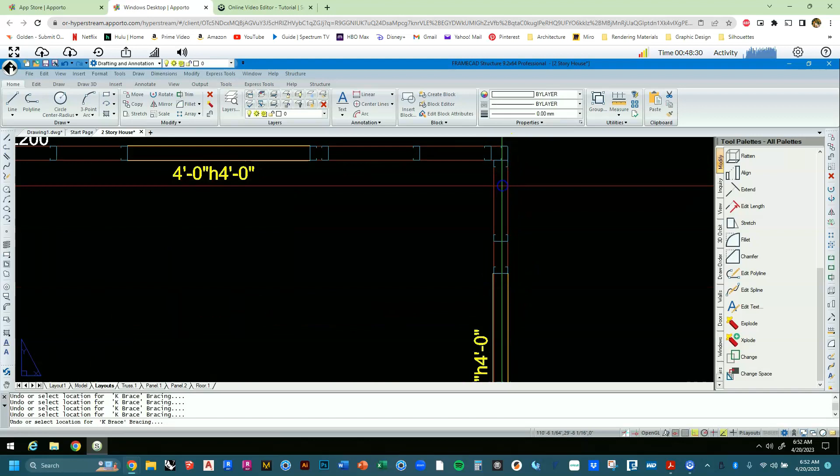We're going to add a brace in the left and right corners of panel 220. So, actually L220. That must mean that's probably 202. Sorry, a little typo there. So add a brace in the left and right corners of panel 220. I'm sorry, 202. So left side, right side. Add a brace in the top and bottom corner of 203. This is 203, so bottom and top. And add a brace in the left and right corners of panel 202.

Okay, I see what happened. Number 8 in the instructions should have said 200. And number 10 should say L202. So, doesn't really matter. What we want to do is we want to put 2 bracing pieces here, 3 on the bottom portion of L201. I want to put 1 in each corner of the remaining panels. Let's hit enter. Hit escape a couple times to make sure you're out of the command.

Now let's type in PCB, and we don't see red anymore. So shortage X 0, shortage Y 0. So by further bracing these panels, we're now passing for our lateral bracing. So that's all looking good.

Let's insert. Let's go to the first floor. So V space 1 space. I'm sorry. I'm going to hit escape a couple times. V space 1 space. PCB. Red. All red. So let's go to bracing options and make sure external sheath one side, internal sheath one side are set. Okay.

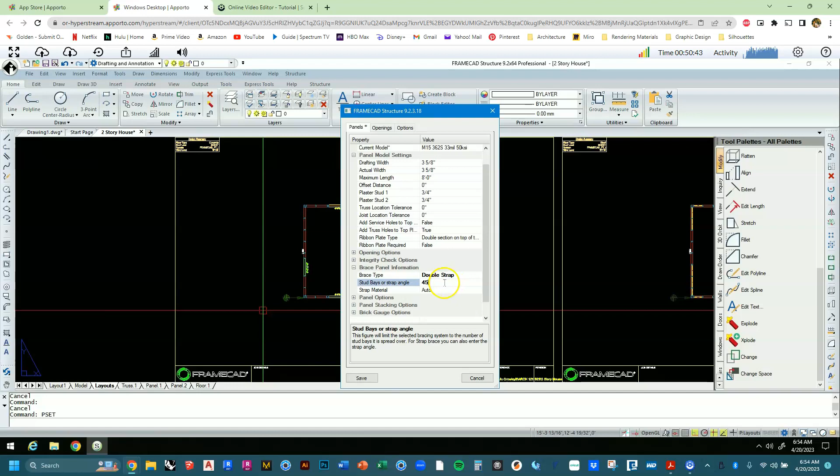In the structure tab, let's go to P-set. So just type in P-set. Hit escape a couple times and hit P-set. Brace panel information. Brace type. This time we're going to do double straps instead of the K-brace. And the stud bays or strap angle is going to be 45. It already automatically sets it to 45. Click Save. And then let's type in PCB.

Okay, so now we're going to insert our bracing. Let's see, where do we want to put them? So if you look at the diagram on page 19, it's labeling where we're putting that double straps. So let's go through and do that. It's going to be the same thing as the K-bracing that we added. It's between studs, so let's click right here. And as you can see, it just went ahead and did it all along this whole part of this panel.

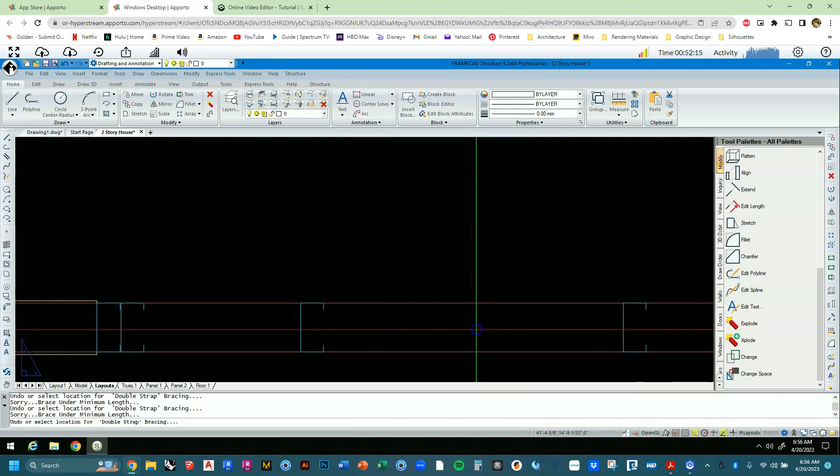And let's do it here. I probably don't have enough space to do it there, so I think one goes here. Does it not? Oh, there we go. I'm just clicking in the wrong area. No? Okay. Can we put one there? Nope. Can we put one in the middle? Nope.

Well, it says here in our tutorial that we should check PCB until the text appears in black. So let's hit escape a couple times, do PCB. Okay, so the text is all red. So let's go ahead and click insert. Alright, let's see where else we can add some. Here. There we go. I put one here. Perfect. I put one here.

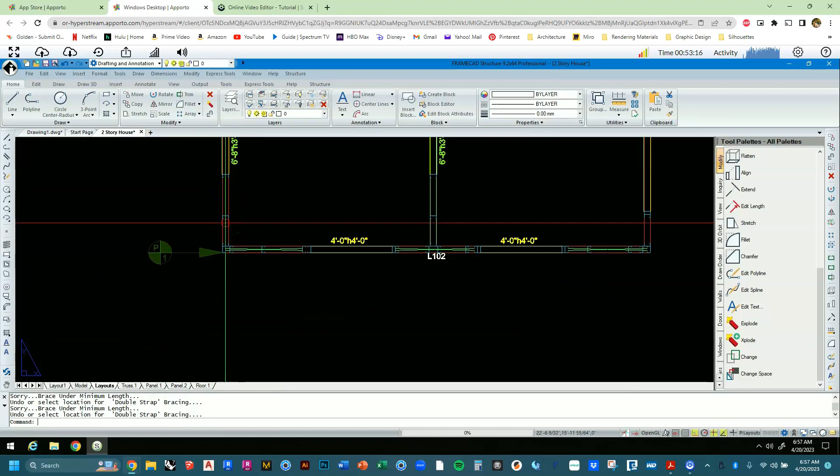Alright. There. Now, can't put one in an opening. Can't put one there. I put one over here somewhere. Alright, there we go. I'm just clicking in between studs. Okay, that one's still like that. So I hit enter. Let's do PCB. Oof. Still have all this red text. But these numbers are going down, which is good.

Let's keep going. Maybe I can put some in here. Will that help? I don't think it'll help. These are non-load bearing. Oh. Okay, let's see if that helps. PCB. Oh, perfect. Alright, I'm done. Alright, so now that everything's looking good, I can hit close. I'm not going to click insert. I'm no longer seeking to add more bracing.

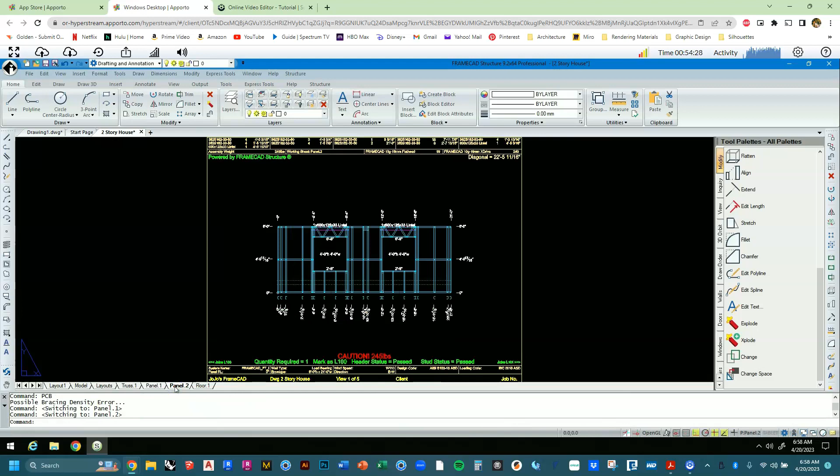Right click on panel point 1. This is panel point 1 right here. And we're going to hit delete. And actually, because of the way I did this tutorial, panel point 1 is actually, these are my second floor walls. So it's actually, for me, in this case, and probably for you, if you're following along, panel point 2, right? It's the 100s, right? The walls that are labeled 100.

So I'm going to right click this one. I'm going to just totally delete it. I'm going to hit OK. Totally fine. Go back to layouts. Type in PPD. Everything's passing. Select all. To CAD. And now I have a new one. You can actually rename these if that helps you.

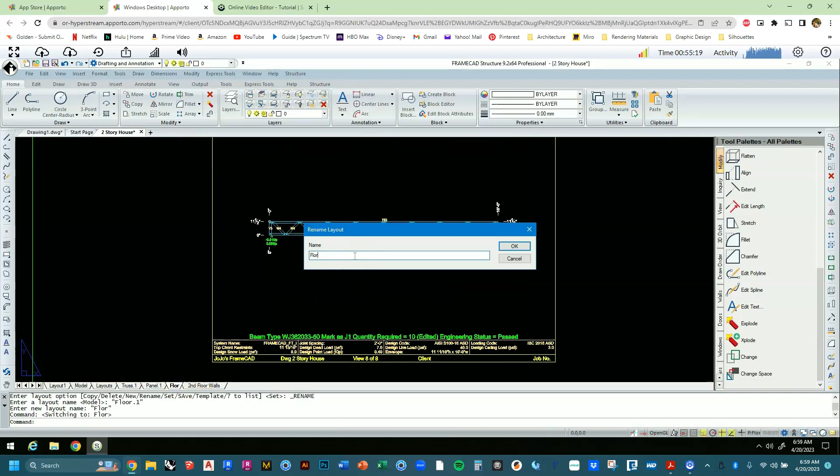I'm going to say second floor walls. This one is floor. Oh shoot, that's not how you spell floor. If you just double click on the tab, it will allow you to change the name. Whoops, these ones are the second floor walls. Dang it, these are first floor walls. These are second floor walls. Trusses. Perfect. That'll be easier for me to understand.

And I think I could probably move them around. No, I guess I can't. Let's see, page setup manager, explore layouts. Oh, move left. Okay, great. I think I'm going to move this one left 1, 2, 3 times. I'm going to move second floor walls left 1 time, and floor I'm going to move left 1 time.

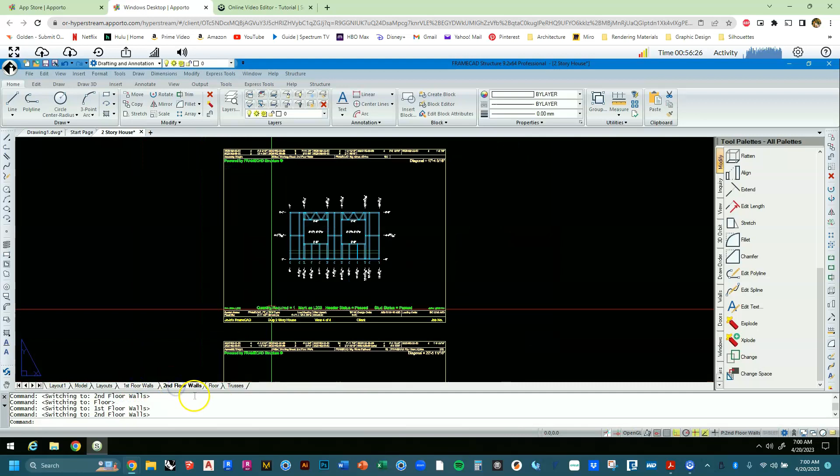That's just me being nitpicky. I just want to see first floor walls, then the second floor walls, then the floor, then the trusses. Just makes more sense to me that way. Oh, let's hit save. Alright, let's do A3D a couple times and check out the cool house that we've made. Yeah, that's looking great.

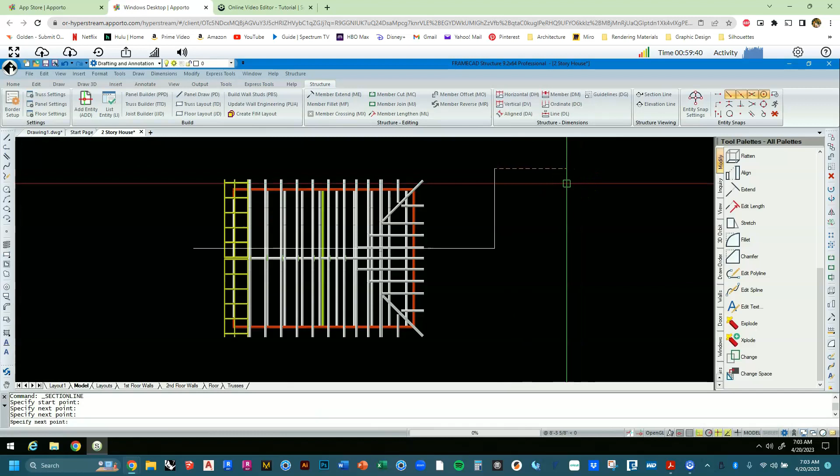So a section is a type of drawing that we use in architecture to cut through our building, slice it open as if it were a cake. So we're slicing it open, and the direction we want to look at it is this way. So let's go ahead and click on this one, and let's hit enter. Okay. Now we have this big giant double X. Okay.

And if you just click somewhere here on the canvas, what it just did is it actually gave me a section drawing. I can move this around, but this is what a 2-story house looks like when you slice through it, where I just sliced through it. So this is called the section drawing.

So let's do another one and click there, and we're going to click above, go straight down, and click somewhere below, and click towards the right. Okay, just hit enter, and I'm going to click somewhere over here off to the side, and there we go. This is another section cut, cutting through the building, but now the opposite way. Okay, so I can actually select all that, hit M for move. What I kind of want to do is I want to line them up.

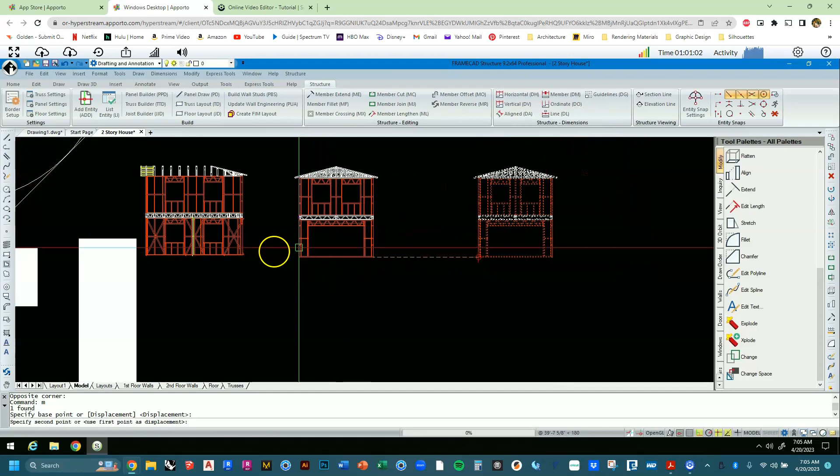So I'm just going to find the bottom. Okay. And now highlight it again and move it just a little bit off so that way they're just aligned. Now this issue is kind of bothering me. These symbols are just like way too huge. And I am unsure how to fix that. I know how to do it in Revit. It's not the biggest issue if we leave it like that, but gee, this is really ugly.

View Manager. It's just an annotation scaling issue, but it's not really the end of the world. This thing is kind of a clunky software. Whatever. I'm just going to leave it like that. Alright, cool. So that's basically it. Let's hit A3D a couple times. Oh, that's right. We're already in 3D.

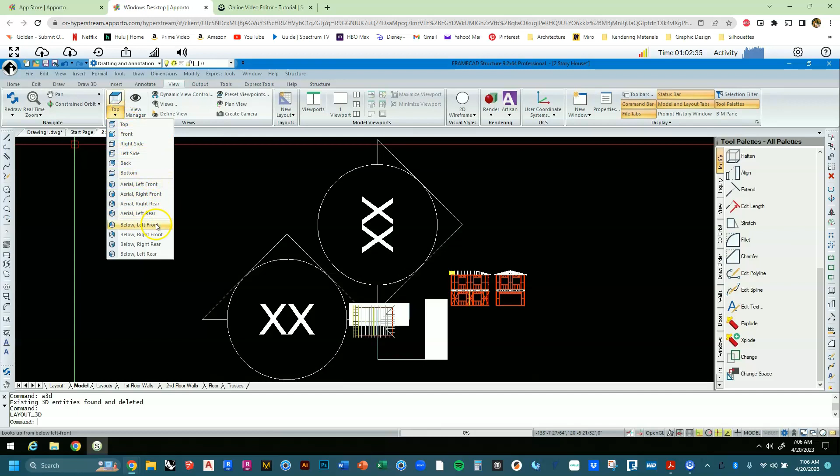So let's click here and let's look at it as an aerial from the right front. And I'm going to hold down Shift, click and drag the middle wheel button. And I want to make sure that you guys were able to do this, so please screenshot this in any sort of way that you can. I think natively Apporto has a screenshot or snapshot component to it. I think if you click this one here, let's see what that does.

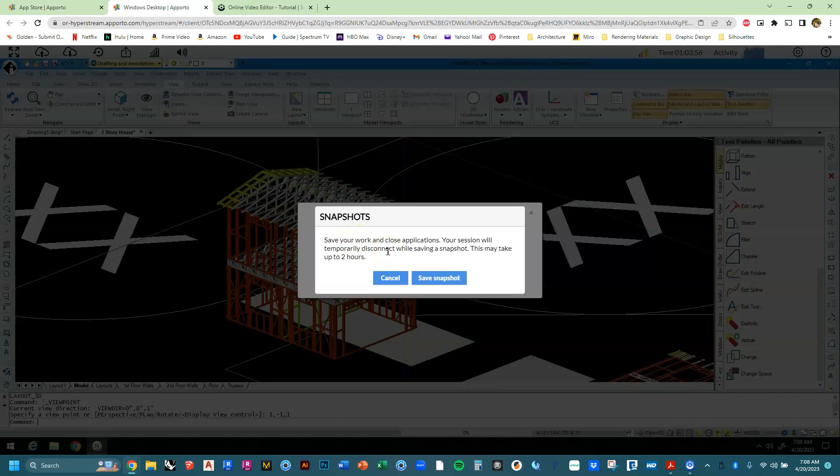Save a new snapshot or restore a previous one. Let's save. Save your work and close applications. Your session will temporarily disconnect while saving a snap. This may take up to 2 hours. Jeez. Let's just cancel that and just close that. That sounds ridiculous.

So the way we can do this is if you click Start, let's see if they have a snipping tool. Yeah, snipping tool is still here. Alright, so snipping tool is a very old Windows application, so it just does a screenshot for you and saves it as a PNG. So the way we're going to do it is if you click on this drop down arrow next to mode, let's do a window snip, and let's go ahead and click on new.

Sorry, try again. New. Now we click here, and that's it. Didn't take 2 hours. Took like 2 seconds. Okay, so all it was was it took a snapshot of the window that we're working in. Right, so what we want to do now is go File, Save As. I would navigate to the desktop, find your folder that you've made, find this class, and let's give this a file name and call it 2-story house.

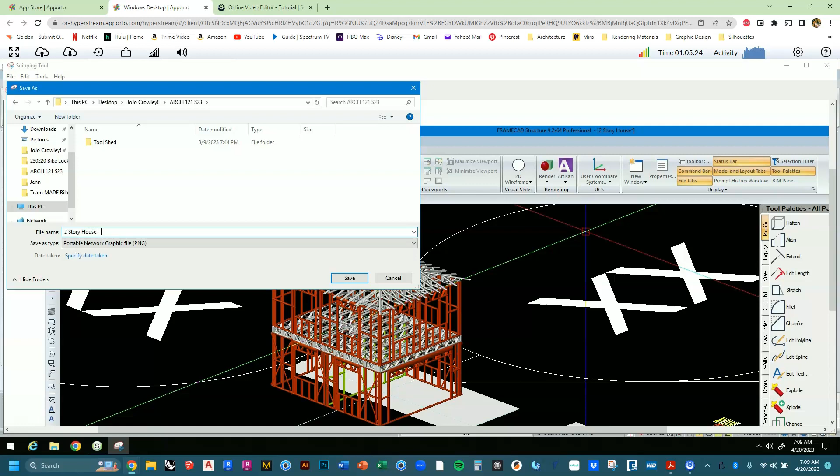Put your initials on it and hit save, and then upload this to Canvas so you can get a grade. Awesome. Save your work. So I'm going to close that down. I'm going to go ahead and close structure down. I'm going to hit yes and no to this drawing 1. And you're all done with the 2-story house for now. And good job.